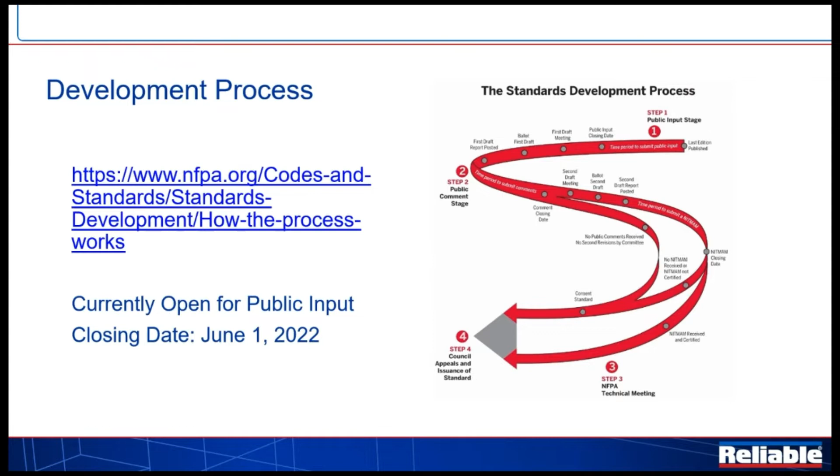Just real quick, the development process. I always like to remind folks to get involved in your industry. Here's how you do it. There's a link right there to the how-to process. The current edition of NFPA 13 is open for public input until June 1st. If there are things that you don't like or don't understand, please become involved in that process, and let's help make this document the best that it can be.

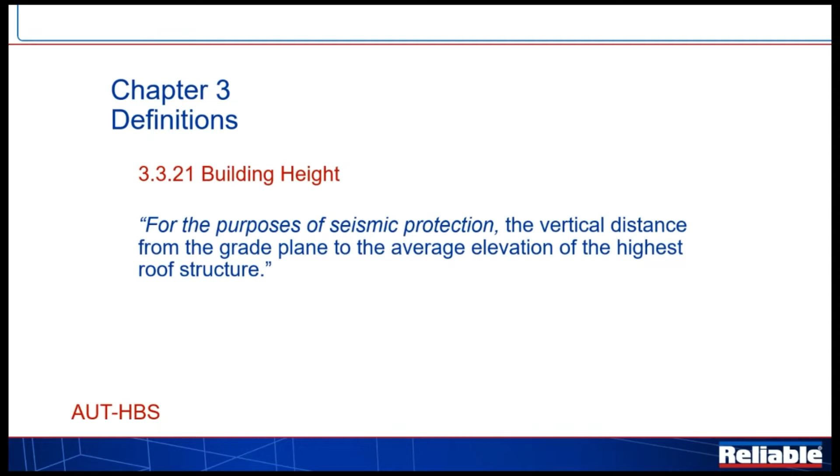So I'm going to go from front to back in the book. We're going to start with definitions. At the bottom, you can see the committee that's responsible for these definitions, it'll help you kind of put it in context. First one off the bat here is building height. You would think that would be something you could find on the architectural plans, but it needs to be defined. In this case, it's defined solely in the context of the purposes for seismic protection. It's not applicable to things about determining whether the building is a mid-rise or a high-rise or fire department access. It's simply for the purpose of seismic protection design.

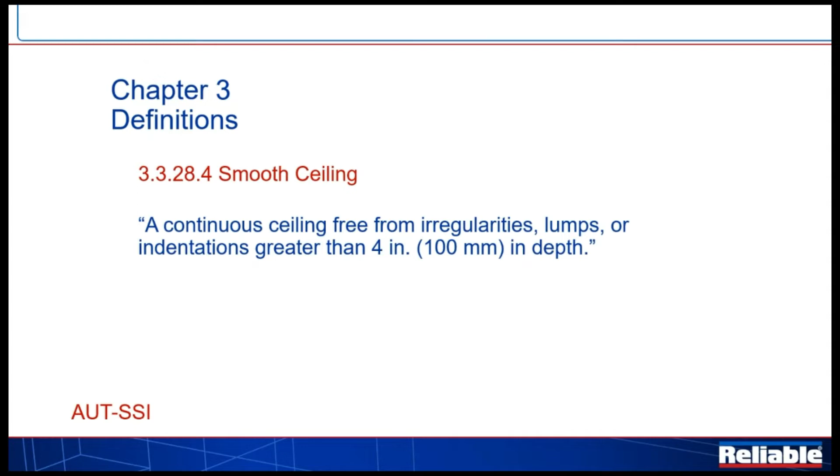Smooth ceiling. In the previous edition, there was some very subjective language that stated free from significant irregularities, lumps, etc. Now that has been more clearly defined as those irregularities, lumps, or indentations greater than 4 inches in depth, so we have something now we can actually measure. The term drop was not previously defined in the standard, but where it was used in the standard seemed to be in line with the historical definition of a vertical pipe supplying 1 sprinkler from above. So now that is what a drop is, 1 sprinkler. If it's more than 1 sprinkler, it's going to be a riser, and that has been defined in the standard for quite some time.

Exterior projections. So again, previously undefined in the standard, this is just an excellent 11-word example of a long committee debate over what seems to, again, be a fairly well understood concept.

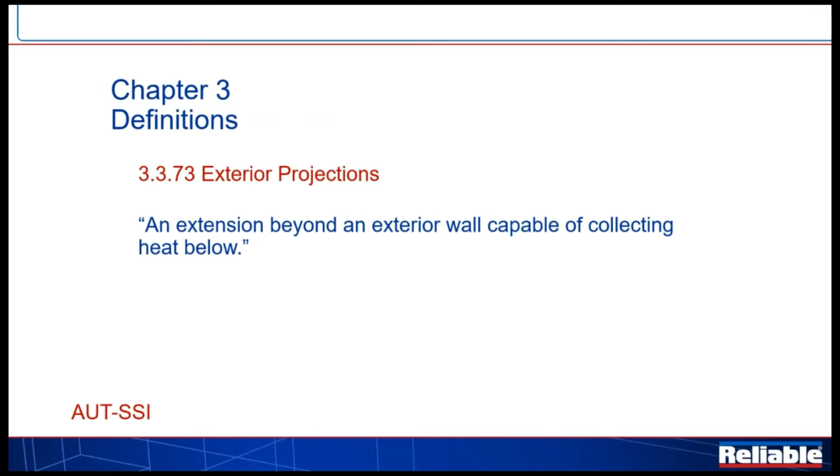However, without the words 'extension beyond an exterior wall,' it could have meant a vertical rooftop projection, and that was never the intent for what is now clearly defined as a horizontal projection from a building wall.

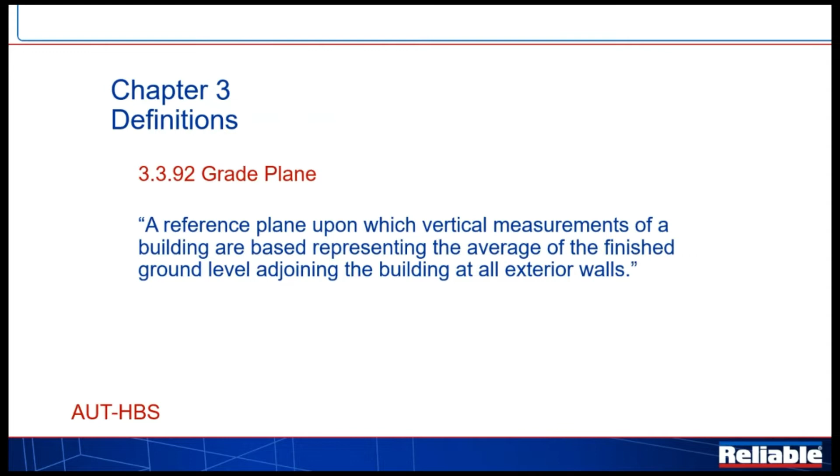Grade plane, we defined a little bit ago with building height, and there was a reference to grade plane. So now we have to define what the grade plane is, and for a sloped grade or an irregular grade around a building, it represents the average of that ground level across the whole perimeter of the building. Again, this is not to apply for building code or building height for code reasons, fire department access, etc. This all ties back to that seismic design issue.

Ordinary hazard group 1. So now we see a return to language that was in the standard before, but if you go into the 2019 edition, you would read something along the lines of where the quantity and combustibility of contents does not exceed the amount of miscellaneous storage of class 2, 3, 4 plastics, tires, etc. So in 2019, for some reason, the committee referenced ordinary hazard group 1 and tried to tie it to a miscellaneous storage design, is really what happened. That language of class 2, 3, 4 plastics, etc., to me seems more hazardous than even an ordinary hazard group 2. So we're now again seeing a return to some historical language in terms of moderate stockpiles, etc.

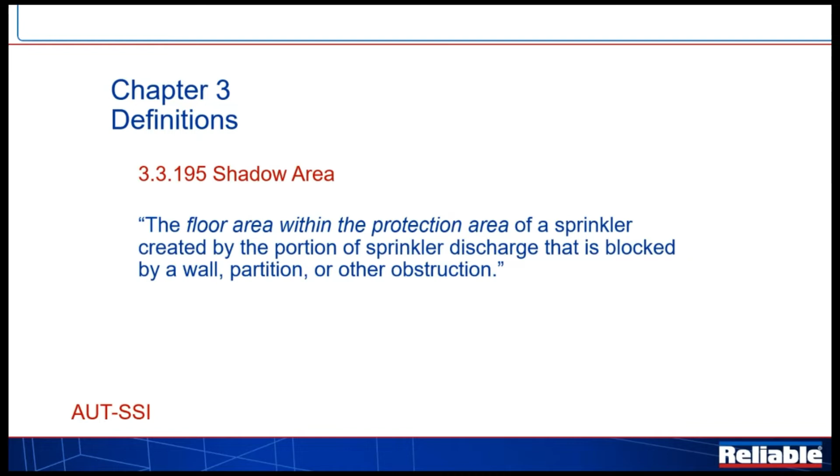The term shadow area we've had in the standard for a while, but there was not a reference to the floor area. There was a reference to the area of a sprinkler, and when you talk about the area of sprinkler discharge, you're now talking in a 3D world, which is really hard to measure right on the floor. So again, the idea, and now very clear, is that the line of protection on the floor, if it's blocked by an obstruction or whatever, that's what we're talking about, not the spray pattern itself, just the footprint on the floor.

You're going to see additional information as far as installation and maintenance and things like that in this edition and in future editions of NFPA 25.

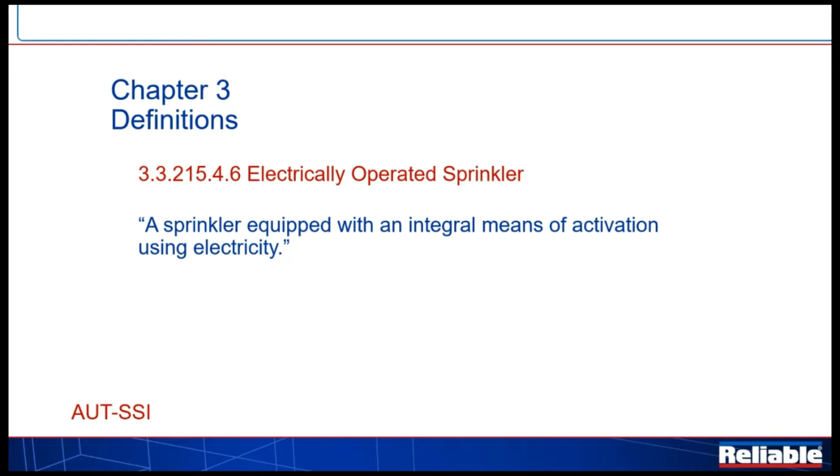Sprinkler system, again, has been defined a couple editions ago. We for a long time did not know what that definition entailed. It has been corrected a little bit.

The term water control valve, we're going to see, has been clearly now defined in terms of something along the lines of an alarm valve, a dry pipe valve, or a deluge valve. So you don't have to have a water control as defined water control valve on your system, but you do have to have a control valve. So simply they took the word water out of that definition. That was the installation committee that did that.

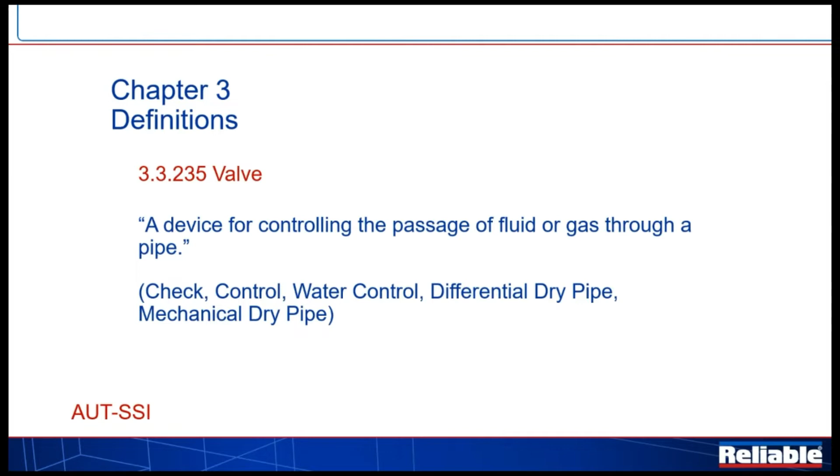Valve has been defined, and then is more specifically defined in other locations in the definitions as a check valve, control valve, water control valve, so that would be your deluge valve, etc.

Now we're going to jump out of the definitions and work our way through the standard in order, here, and Chapter 4, entitled General Requirements.

The first thing that we run into in general requirements for some odd reason is miscellaneous storage and things like that. So what this particular statement is intending, it's a very awkwardly worded statement in my opinion, but what it seems to be intending to say is that if you have solid shelves in areas defined as miscellaneous storage, they do not need to be sprinklered in most cases. The requirements for sprinklering solid shelves are found way out in Chapter 20. But again, for miscellaneous storage incidental to the use of the building, solid shelves are not required to be protected per 20.19.

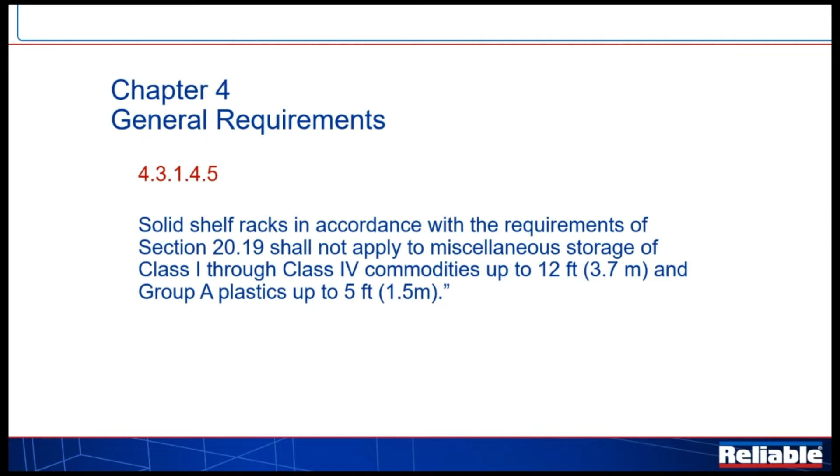Protection criteria for miscellaneous and low piled storage. So those two rolled together, but they're quite different in terms of what they are. It's not necessarily a new section in the standard, but just be aware that when you start talking about miscellaneous and low piled storage, you will be limited in building height. You'll be looking at things like OH1, OH2, EH1 designs, and anything above 10 feet. So miscellaneous storage is going to go up to that 12-foot mark in a lot of cases, 5 foot for Group A plastics, etc.

Once you're over that 10-foot mark, you're probably going to be putting a level of in-rack sprinklers into those storage occupancies.

Water supply treatment is another interesting one that probably needs cleaned up a little bit. For some reason, the ways of treating MIC and general corrosion have now been split out, even though we like to see repeat information rolled together. There are 4 methods to address MIC and 6 methods to address general corrosion, but about 4 of them are basically the same. So it needs cleaned up a little, and in reality it's talking more about pipe treatment than water supply treatment. Look for some cleanup along those lines in the future.

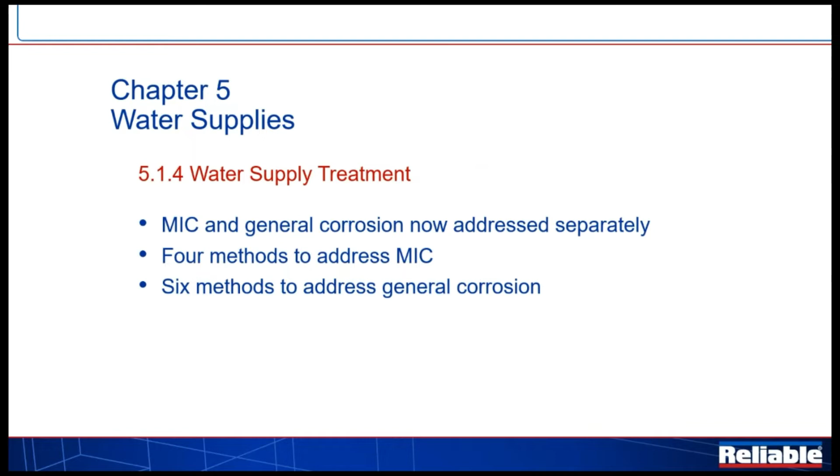Chapter 6, Installation Underground Piping - no, that is not a typo, that is the title of the chapter. Why it's not 'Installation of Underground Piping,' I have no idea, but I wanted to let you know I didn't make that mistake. We'll look at getting that corrected as well.

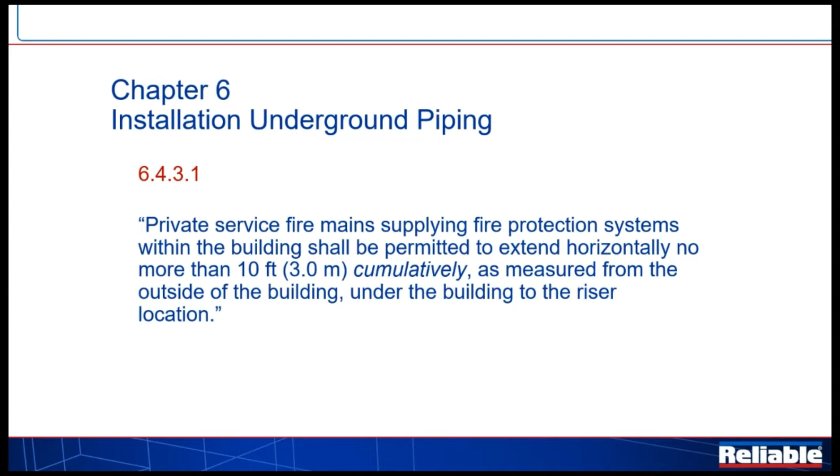We've known for a long time that we cannot run pipe for long distances under slabs inside a building. The committee, for some reason, changed the word 'under' to 'beneath,' except when they added this clarification, where we still see the word 'under.' The key thing is you cannot go 2 feet into the building and then 90 feet to the left along the wall and say you haven't gone more than 10 feet into the building. The word 'cumulatively' now accounts for that horizontal breakover that might occur around a grade beam or something like that. So it's not 10 feet in from the wall, it's 10 feet cumulatively under the slab.

Restrained joint systems - again, a simple change here, adding the word 'listed' in front of these particular types of connections. To me, it would make sense that that would always be understood, but without that word, it tells me that at some point there was a conflict between what an AHJ thought and what an underground or fire protection contractor thought. There was probably a little locking of horns here. Remember, AHJs are part of the public, and someone came in and said, let's clean this up - and now we very specifically require listed connections on our underground piping arrangements.

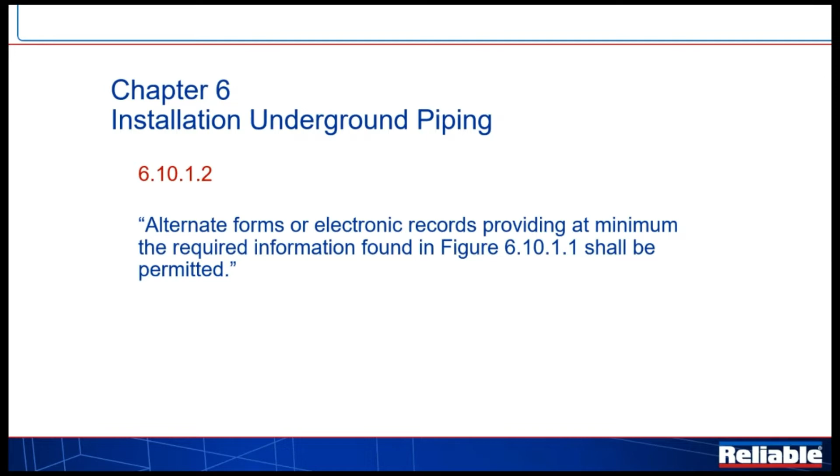With regard to keeping records of testing, this is going to essentially start cutting across all aspects of record keeping, all the way out into the NFPA 25 world. We're now going to see an acknowledgement that electronic records, with the AHJ's approval, are an accepted way of keeping records rather than everything being on paper. We all know the fallacies of trying to keep shop drawings and submittals in those nice clean riser rooms. You'll see similar information along these lines in NFPA 25 as well.

Flushing of piping - again, a couple of additional requirements or allowances thrown in here for when you cannot meet the maximum flow rates you need. For instance, if you're trying to flush an underground main up to a fire pump, that fire pump is providing extra energy into the system. All it's saying is that you will flow the maximum amount of water that you possibly can from that system to flush that main out. We also see the suction piping added to that requirement, and an acceptable method now is what's considered forceful swabbing of the pipe, with some additional requirements and constraints surrounding that method.

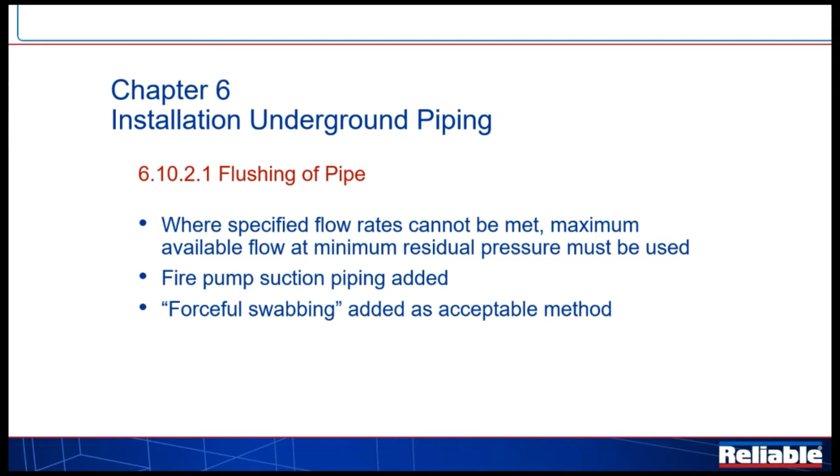Moving into Chapter 7, Components and Hardware, Temperature Characteristics of Fire Sprinklers. I had made a note that this seemed to be a solution in search of a problem - for some reason, the thought was to split glass bulbs and links out into two separate tables. The only real change I could find was for ordinary temperature sprinklers: now, 155-degree bulbs are permitted in areas up to 120 degrees ambient temperature. We still see that the 165-degree ordinary solder links are limited to the traditional 100-degree Fahrenheit ambient condition.

Perhaps there's some idea that glass bulbs are more durable in those temperatures for long periods of time. We would debate that ourselves. At the end, it doesn't really matter for us. I just don't like the idea that we've now essentially given building owners permission to take the temperature in those buildings up to 120 degrees if they're unoccupied, if there are glass bulb sprinklers in there. Doesn't make a lot of sense to me, but it is what it is.

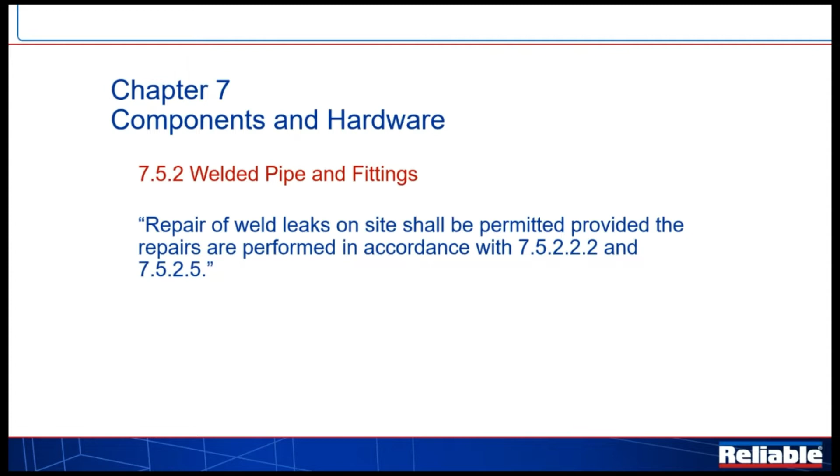Welded pipe and fittings. We have had the allowance to do field welding in the past with the appropriate safety measures and requirements for welding procedures, etc. But there was not a specific allowance to fix leaks. So now we have this allowance that the repair of weld leaks, in addition to field welding, is now approved, provided that you follow the appropriate safety measures and welding procedures specified in 7.5.2.2.2 and 7.5.2.5.

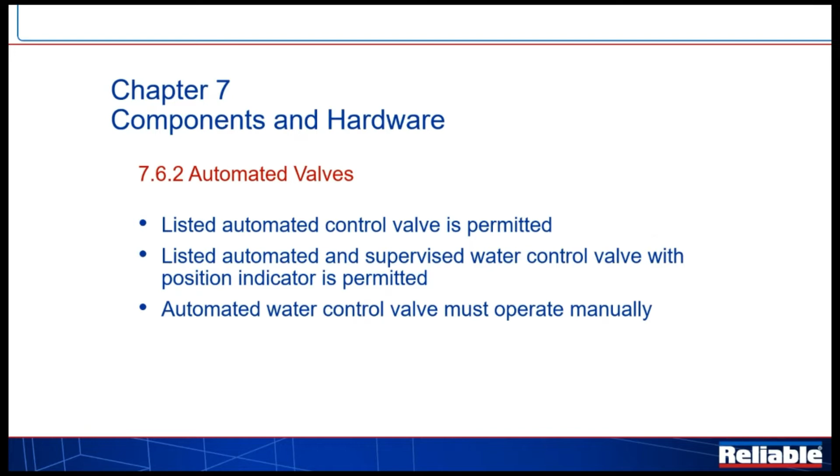Automated valves. I don't remember this one coming up in the committee meetings. Why it was added, I can only presume that someone may be looking to bring a product into the market, or has run up against a situation where an automated valve, perhaps a motorized control valve of some sort, that maybe was deemed unacceptable by the standard. Now essentially it is allowed, provided they're listed, provided they have the indicator, etc. And as well, they must be able to be operated manually. So that is now available to us. Whether or not those listed valves exist, I don't know, but we do have the opportunity.

Water flow alarm devices. This was an interesting debate in the committee, a long debate, with a lot of smart people in there trying to figure this stuff out for the industry. The requirements to get a water flow alarm have now been split into two: one for mechanical/water motor gong type activities, and one for electrical alarms. The 5 minute allowance that has historically been in there for the water motor gong remains.

For an electrical alarm, it has now been reduced to 100 seconds. It was my understanding that the thought here was that the device itself would trigger within 10 seconds and could have a retard as long as 90 seconds built into it. So that's how we get to that 100 seconds. Kind of more appropriate, almost to the NFPA 25 world in terms of testing, but obviously from the get-go we've got to meet these requirements for new systems.

You're going to see in NFPA 25 in the next edition some more information about the inspection and testing of devices in the automated world. Potter Electric, for instance, has that flow switch that basically triggers itself without flowing water. There's been a huge emphasis on saving water and things like that. So we now have some language about those devices and the installation of those devices, and you can see the words on the screen. It must be as effective as a manual examination, right? Trying to align this with what you would get in today's world.

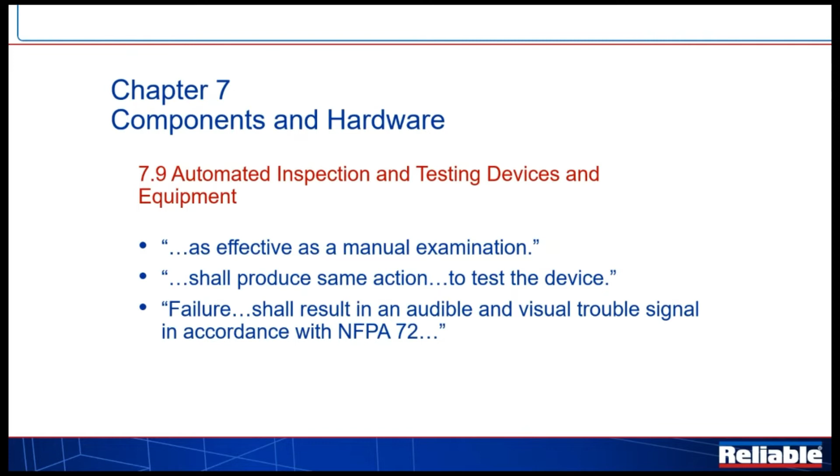It shall produce the same action, right? The vane in the water flow indicator must move, and then if the device fails, it must send a signal to the panel that says it's not working properly. So again, we're going to start, this will build in the next few cycles until it's fully vetted. But again, watch for some more information in NFPA 25.

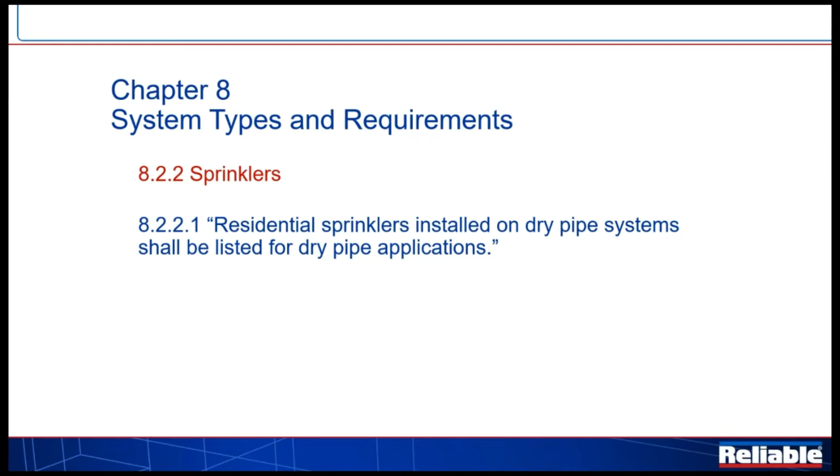This statement on the screen: residential sprinklers installed on dry pipe, of course they shall be listed for dry pipe applications. But if you look in 2019, what it says is residential sprinklers shall be listed for dry pipe applications. Very, very poor wording, because what it says is that I don't care if you're using them on a wet system, they shall be listed for dry pipe applications. Again, poor wording that's now been cleaned up. When used on dry pipe, obviously they need to be listed for dry pipe. And secondly, in the 2019 edition, that statement fell under the heading of dry pipe system water delivery, of all places. So again, a cleanup of the document to make that in a better spot.

The manifold test connection. You guys remember the table that came out a few cycles ago where you can do 1 orifice, 2 orifice, 3 orifice, 4 orifice, and your water delivery time descends a little bit into that 40-second range, etc. It seemed that table was built for the fluid delivery program, and I believe it's still applicable to that. However, it's been moved into its own section, so it's essentially been extracted out into its own area.

Underneath it says that a system meeting the requirements of this section, in other words if you build a 4-manifold or 4-orifice manifold, shall not be required to also meet these other 2 requirements. Those 2 requirements are 8232, a 60-second water delivery, and 8235, the option to calculate water delivery using the available programs.

So it's very interesting, I don't know if it was the intent, and this will be an interesting discussion this cycle. If I manifold it, I don't have to do either of those. That's technically the wording as I understand it. So we'll see if that holds and whether or not that was actually the intent.

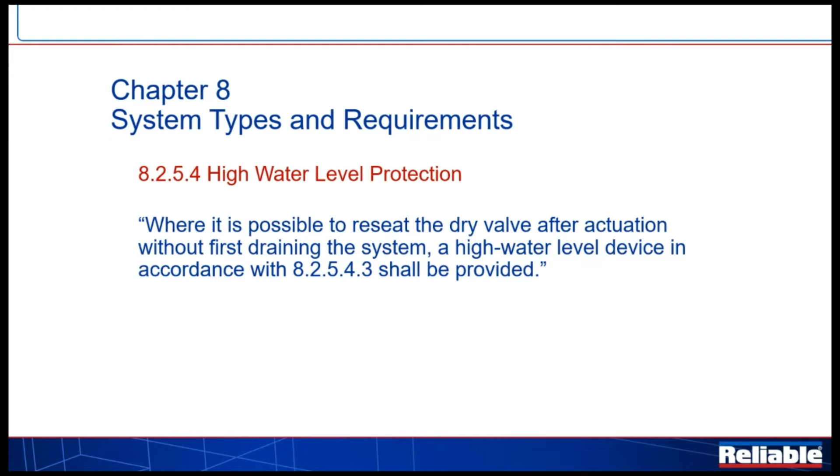System types and requirements. We are going to see in the standard an allowance to use a C factor of 120 on dry pipe systems and double interlock pre-action systems when nitrogen is being used as the supervisory gas.

And the way that's going to be allowed, we can't just say hey, we're going to put it on and turn it off, right? That's the fear, somebody's going to put this generator on, they're going to turn it off. So again, we have to put the rules down. If you're going to want to use that C factor of 120, it has to be a listed generator, a minimum of 98%. We're now told how much leak rate is allowed, 1.5 psi per hour.

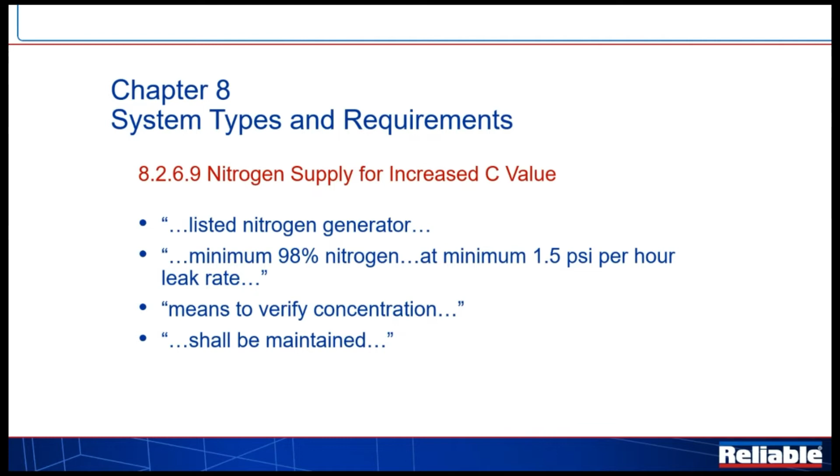The system, the generator has to be able to maintain that, even if it doesn't exist, it's got to be able to maintain that. You've got to be able to verify the concentration. The generator manufacturers have all the devices and technology to be able to do that. And then again, kind of rolling into the NFPA 25 side of things, it shall be properly maintained, and there will be additional information on what that looks like in the future in NFPA 25.

Air pressure values for single interlock pre-action systems, the requirements for double interlock systems being a minimum of 7 psi to basically remove that seat out of the sprinkler. We know we need 7 psi, that's always been the historical minimum.

Single interlock systems convert to wet pipe systems upon operation of the detection, therefore the air pressure or nitrogen pressure really doesn't come into play. Old systems, Reliable had one years ago that used 30 ounces of air, a very, very small puff of air in the piping. The problem is it's very difficult to manage low pressure alarms when you're in those low ranges. So again, all it's saying now is look to the manufacturer to give you some guidance on those single interlock systems.

This 8615 is regarding antifreeze and some of the new products available out there. When I look at this, I just think, we do shop drawings, this information is all on the shop drawings, or should be. Now we've got to go out and hang a placard on the system. Sometimes I think we go placard crazy in this industry, but regardless, you will be required to hang this sign out there.

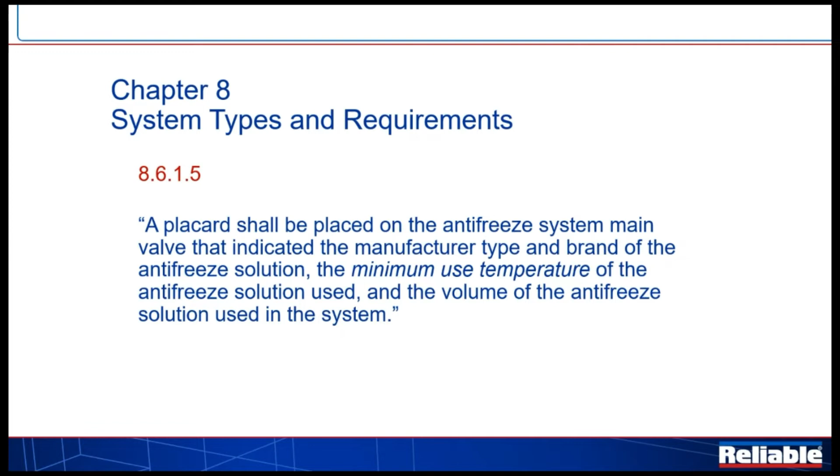All of the new products, the listed products, are going to tell you what the minimum temperature it's listed at. And so this is just essentially a nod to the fact that we're not going to be able to change that rating by adding more of something. Pretty straightforward concept there.

A new area that does not require sprinklers. Very common to see dryer duct vents going from the laundry room out to the exterior wall. Oftentimes we're running cabling in there, maybe even running fire protection piping in those soffits. And in a combustible environment, if it's built with wood, could you essentially be creating a space that needs sprinklered?

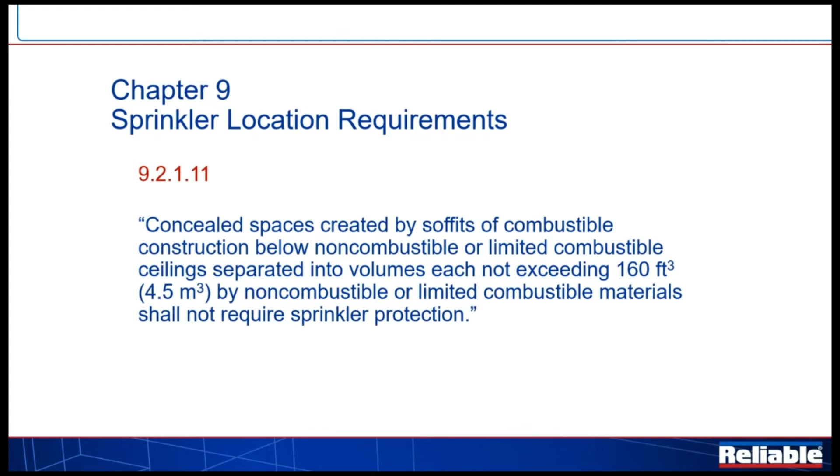Nobody wants to be doing that, but we now can see that if we're doing this properly, we have this 160 cubic foot requirement that we can now point to the AHJ and say, here's why we're not protecting inside this soffit. So that's nice language to have added to our repertoire.

Sprinkler location requirements. 9.2.2, we've added the word exterior platform. So again, one of these semantic debates, whether or not exterior docks, the word exterior applied to platforms, it now clearly does. In the past, you may have attempted to do something like an area below the stage in a school that had no storage in it, was non-accessible, but perhaps it was combustible. And you may have pointed to this and said, this is why I'm not sprinklering that area. Now, very clearly, this states that these are for exterior platforms.

Could you build an interior platform still that does not require sprinklers? Yes, you could, but you would now have to go back to 9.2.1, which is that long list of areas that don't require sprinklers in order to address that interior platform. So very clearly now exterior related.

Sprinklers shall be required for porte-cocheres that are located directly below floors. So imagine you're pulling up to the nursing home or whatever type of occupancy it is, but instead of a carport type of porte-cochere, it's underneath an occupied part of the building. So in the past, it could have been perceived, and most likely was, as if that was non-combustible, right? It said non-combustible porte-cocheres did not require to be sprinklered. Again, now making perfect sense in my opinion, that if there is occupancy above it and you're essentially under a building, those areas must be protected.

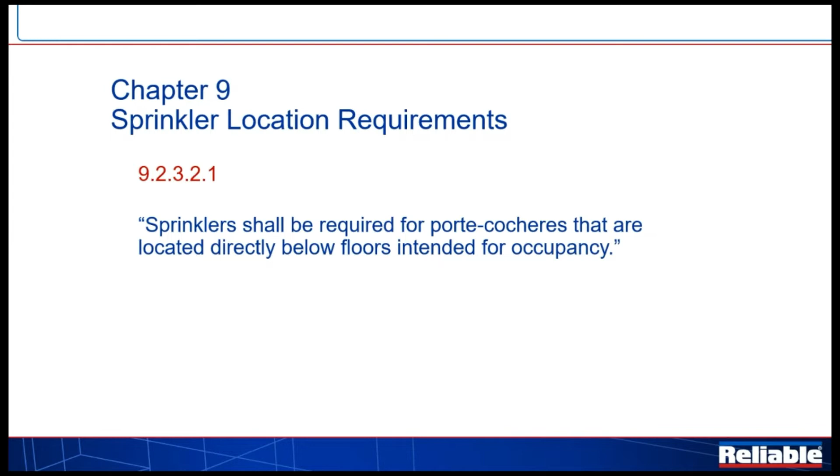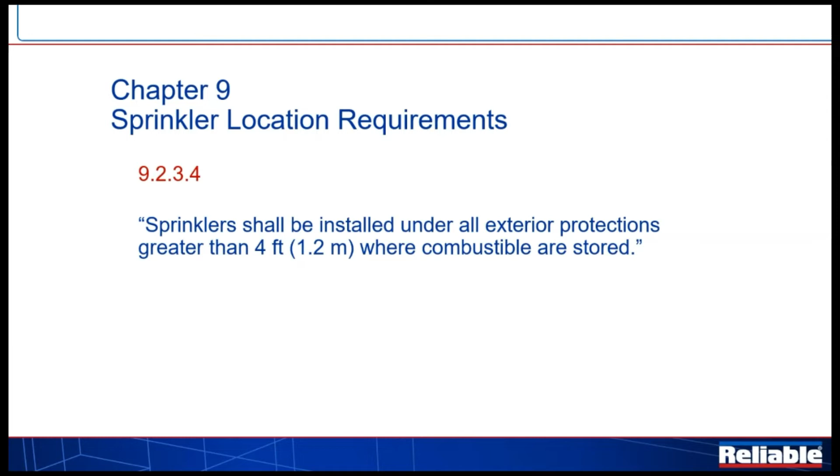If you were to go through NFPA 13, 2019, again, which I did page by page, it actually appears in 2 spots. One says 2 and one says 4. So the requirement for the 2 foot has been removed in the 2022, and it is now 4 foot where combustibles are stored. Again, just some cleanup, where things appear twice in the standard, that was an offshoot of the complete rewrite of the 2019 edition. So there were bound to be some errors, and we're seeing some of those get cleaned up.

Sprinklers shall not be required in closets and pantries where other governing laws, etc. So other standards, maybe it's NFPA 101. I don't know what they are, but if there are other recognized standards that say that these closets and pantries don't need to be protected, this is the allowance for an AHJ to allow you to leave those sprinklers out. You'll notice that it's not specific to hotels, motels, or anything. It's any closet or pantries that are addressed by another NFPA standard.

Furniture and cabinets. If you've been in a modern hotel room, we spend a lot of time in Marriotts ourselves. Very common to see a big piece of furniture that encompasses the wardrobe, right? The coffee maker, the microwave, the desk. They bring these in, they bolt them to the wall, and even though it's a quote-unquote closet, the standard is now clarifying that these move-in pieces of furniture do not require sprinklers. They do remind us in these sections, however, to make sure that the sprinklers we put in the room are spaced to the back wall of that environment.

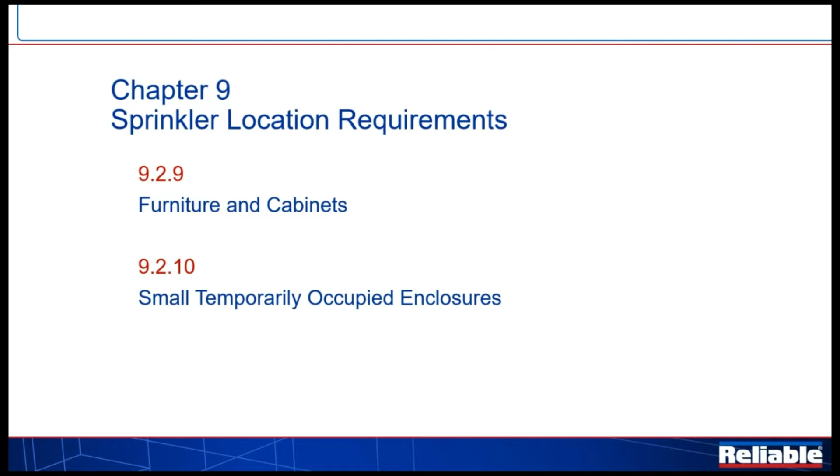And 9.4.1.2, if you don't know what this one is, you're going to want to make sure you lock this one in your brain and highlight it. It states that sprinklers can be used outside of their listing when specific situations exist that require unusual water distribution. Okay, so an example of this could be something like putting a pendant sprinkler in the sidewall position in a horizontal duct, right? We put a sidewall in there, it's going to spray right to the other side of that small duct, and it's just going to create a flood in there.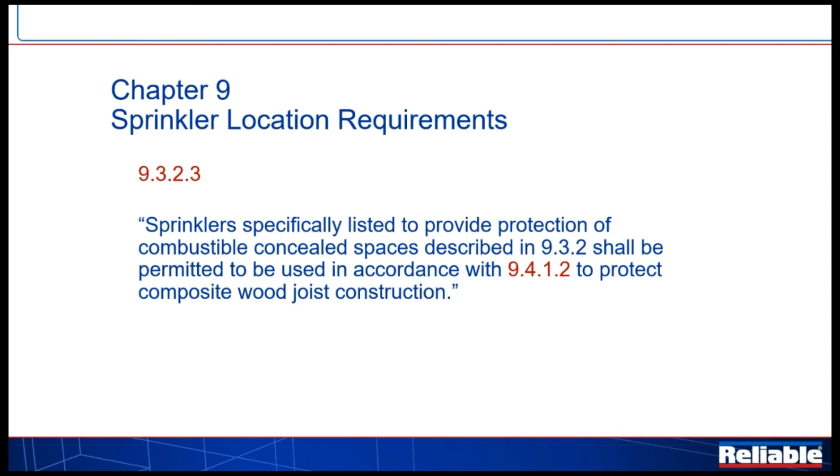What you might want to think about doing is throwing some water sideways off of that pendant deflector in the sidewall position. This would be an opportunity to say, hey, this is better fire protection, and this section 9.4.1.2 is my allowance to do that. You might not always win, but be aware that the opportunity presents itself there.

Elevator machine rooms. This section was formerly called elevator hoistways and machine rooms. That was the title. For some reason, maybe it's an architectural concept or a building code concept, we now have to identify machinery spaces, control rooms, control spaces, etc. You probably see these called out on the plans. Again, why we have to do this, I'm not quite sure, but it's there.

The couple things that have changed, the temperature requirement used to state they needed to be intermediate. That may not have been enough. I've been in some very hot elevator machine rooms. So for the standard to say, use this temperature sprinkler in this environment, probably not a good idea. We now see that they're not going to specify the temperature rating. They're going to leave that up to us. But what they are going to tell us is the sprinklers in those environments will be standard response sprinklers. Unless the requirements of et cetera are met, ordinary or intermediate temperature sprinklers shall be permitted.

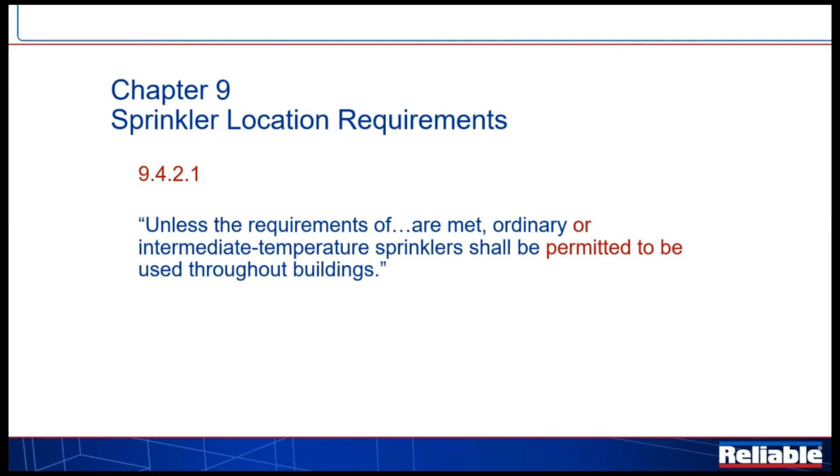So what did this used to say? It said ordinary and intermediate temperature sprinklers shall be required. Again, poor wording. We kind of knew what we meant to say. We just didn't say it properly. So now what we're going to say is you have your choice of ordinary or intermediate sprinklers. You're permitted to use either one throughout the building. We're seeing a lot of movement these days, particularly in the residential world, of intermediate temperature sprinklers being installed throughout environments. And now that this language is cleared up, that should be a little easier pill for the AHJ to swallow.

So you see the word global on this table formatting. And we're just going to walk through one example of this, but it's going to cut across a lot of ground in the other obstruction tables and the way tables were formatted in 13 historically. So imagine the standard beam rule that we use. How high can our deflector be above the bottom of the beam given the distance away from the beam? Less than 1 foot, we have to be even or below the bottom of the beam.

So what did it used to say? There it is, 0. Now we go to 1 foot to less than 1'6". What it said is that you must be 2.5 inches above. The strict language said you must be 2.5 inches above. Well, that's not true. You had to be 2.5 inches or less. I mean, the better spot would be further down and allow us to spray better under that beam. So these debates have been swirling in the committees for years and years.

Finally, they have come to consensus that the better way to say it is what is shown there. Less than 1 foot, we're 0 inches. We've got to be equal or below. If we're 1 foot away, we're 2.5 inches above the bottom of the beam or less. So that's lower to the bottom of the beam, et cetera, et cetera. And all of those tables for EC sprinklers and ESFR and all that are going to be reformatted to make this just a little bit clearer.

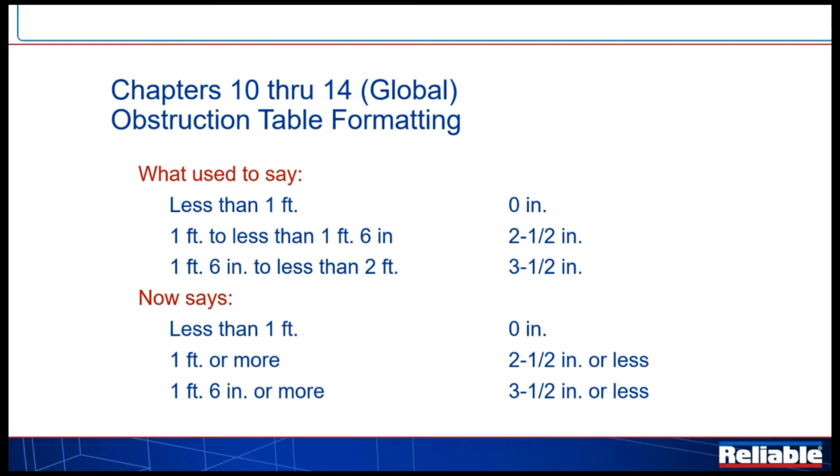Another kind of quasi-global addition that's been made is for narrow hallways up to 6 feet wide. Again, there's some limitations here. You can have a maximum 12-inch obstruction in the center of that hallway, and you can have a sprinkler dead center on that obstruction as long as you're 12 inches away. That is now going to be allowed.

Two additions to the historical places where we can use sidewall spray sprinklers. We talked earlier about exterior projections. So now we know what that is: it projects out from the side of the wall and is capable of collecting heat. We identified that earlier. We can now say we can use sidewall spray sprinklers for that.

And in the event that someone says we don't have direction on how to handle car stackers, I'm not going to say that it's clear as mud, which it kind of is, but we now have the allowance to use sidewall spray sprinklers in car stackers and car lift systems, as long as we provide them under each level of cars.

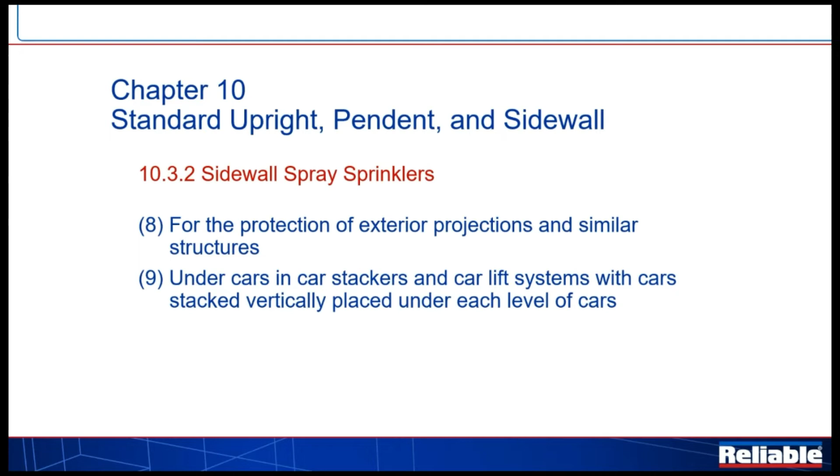No real guidance given on, again, what that occupancy is. Is it ordinary, group 1, group 2, extra? At least in my opinion, there's still some work to be done here, but now we're seeing that these things have to be protected. We've got to give some direction to the contractor on how to do this. So again, now can be used for car stackers.

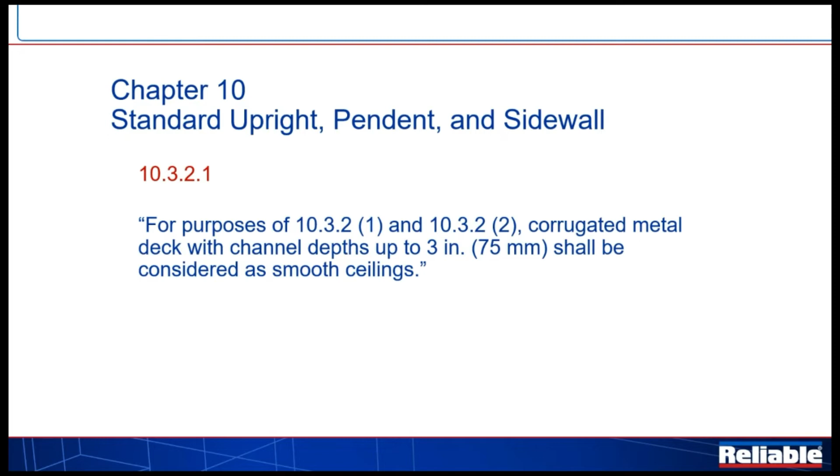This was an interesting one as well. If you're in a building that has Q decking or pan decking, the corrugated metal deck, and you, for clearance reasons or whatever, had to throw water outward from a beam, and you looked at that corrugated deck and said, I can't use sidewalls here because they're not listed for this. The standard is now telling us that when those channel depths are up to 3 inches, you can consider it a smooth ceiling and use sidewalls for that application. So that's just kind of a nice little addition as well.

We now move into extended coverage upright, pendant, and sidewall sprinklers for suspended or floor-mounted obstructions. So think in terms of the privacy curtain that's hung around your booth at the hospital, or perhaps a pony wall coming up from the floor. We see these new requirements provided for ordinary hazard when using the EC sprinklers. We don't see them for standard spray for ordinary hazard. And the only thing I can think of is that the drastically different spray patterns that come off of these deflectors must account for this allowance in the EC flat spray world to get some water on the backside of these obstructions.

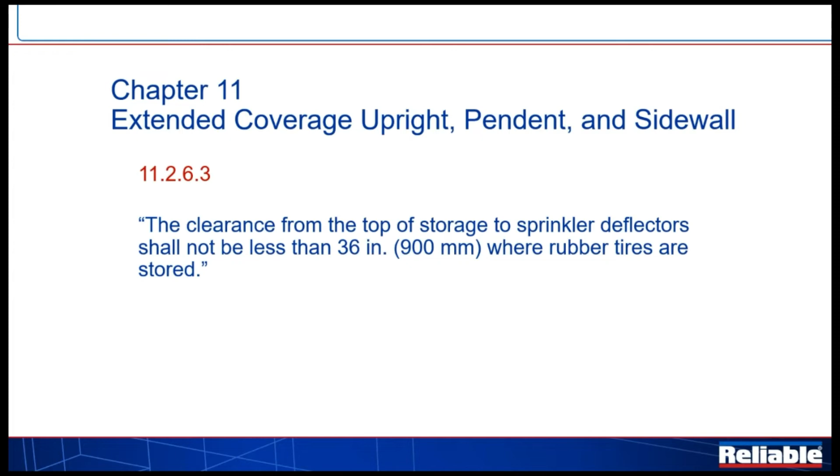A nice reminder that for EC sprinklers, for rubber tires, that 18-inch traditional clearance, right? We have 36 for CMSA and ESFR, but for CMDA and these other types of sprinklers, you could have thought maybe that 18 inches was all the clearance you needed for rubber tires, and rubber tires is always going to be a 36-inch clearance to the deflector, regardless of the sprinkler type.

Maximum distance between sprinklers was an interesting issue, particularly with sidewalls. When you had sidewall sprinklers throwing toward another sprinkler, the old wording stated that you could not have a sprinkler within the coverage area of the opposing sprinkler. The debate was always whether that meant the maximum coverage area or the hydraulically calculated coverage area. If I have a sidewall that can do 16 by 16 and is also listed to do 14 by 26, am I using the 16-foot throw as my mark to the sprinkler on the other side, or am I using 26? It was not clear, and there was a lot of debate about this. Finally we decided to just make it a set distance: we're going to use 12 feet, and that is now the rule.

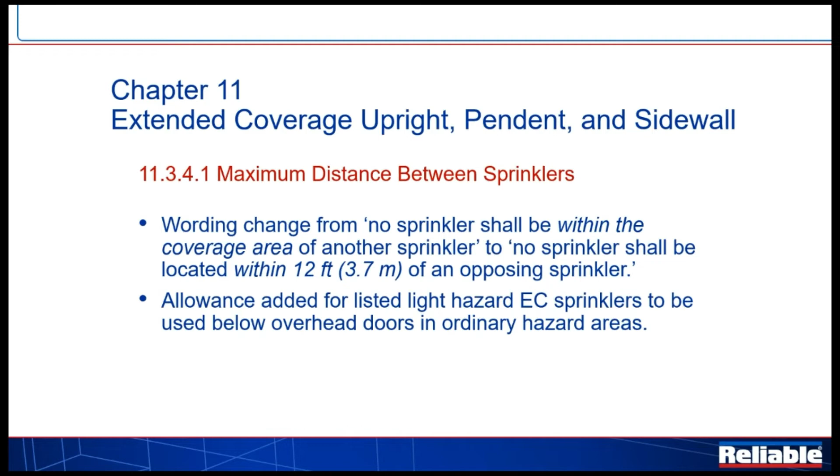Another addition was the allowance for light hazard EC sprinklers to be used below overhead doors, not in a storage occupancy, but in ordinary hazard areas.

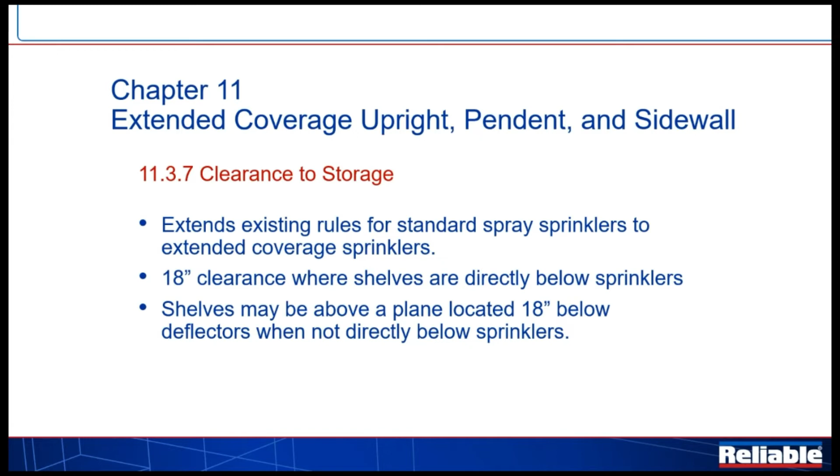Clearance to storage: imagine a small closet or storage room with shelves along each wall, and you're having trouble locating sprinklers because of lights or other obstructions. We've had this rule for standard spray sprinklers and have now extended it to extended coverage sprinklers. If the shelf is under the sprinkler, and the sprinkler has to be moved off to the side for some reason, you must maintain 18 inches to the top of whatever's stored on that shelf. If the sprinkler is pulled out off the edge of the closet, so it's not directly over the shelf, then shelves can go all the way up to the ceiling.

This is a pretty straightforward one. It was previously mentioned in one location as the 36-inch rule. All we've done is add some new wording and clean up figures to indicate that in a peaked ceiling area for residential, regardless of how you place those sprinklers, you shall have a sprinkler within 36 inches of the peak in some form or fashion.

Pendent residential, recessed pendent, and concealed. Concealed is highlighted because in the 2019 edition there was concern leading into that adoption that concealed sprinklers weren't going to perform properly in very deep beams, up to 14 inches deep. So in 2019, that got lowered to 4 inches, because we've always had a 1-to-4 deflector distance rule for residential sprinklers—that was the magic number. For lack of better information, the 2019 edition reduced it to a 4-inch beam depth for concealed sprinklers. Now, with future testing and people looking at it in different ways, we're going back to allowing concealed sprinklers to be installed in those 14-inch deep beams. So that's good to have back.

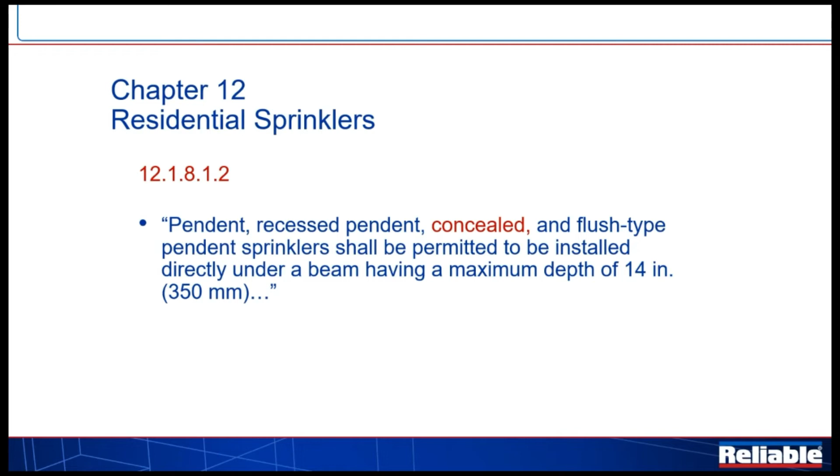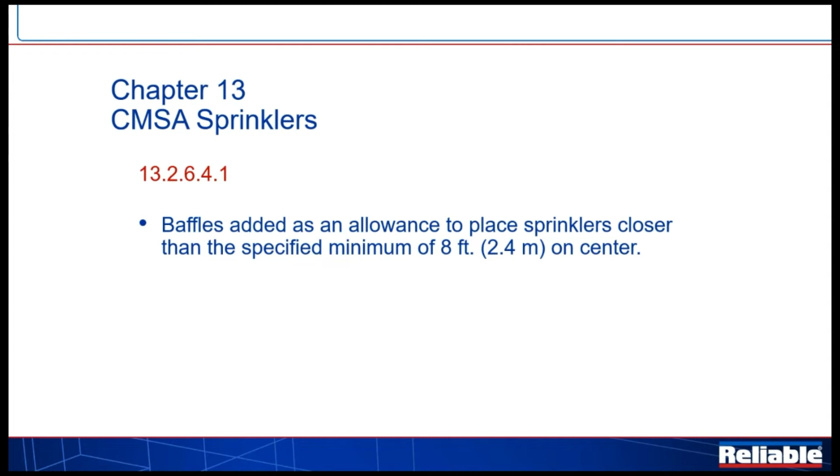CMSA sprinklers—a few years back, maybe 2013 or 2016, we saw baffles being added to different types of sprinklers. They've now been added to CMSA sprinklers to give us some relief when sprinklers are closer than 8 feet on center, and the rules spell out how long and how deep those baffles have to be.

The requirement for ESFR in obstructed construction to be placed in each channel where structural members exceed 12 inches is not new. What was missing was guidance on our hydraulic calculations at that point, since the standard says ESFR sprinklers cannot be closer than 8 feet apart. That wasn't a cold-solder issue—it was an acknowledgment that setting off too many ESFR sprinklers might over-challenge our piping network. So now we're saying that if the sprinklers are separated and the line of sight between them is completely broken by that structural member, they can be less than 8 feet apart. However, within the channels, along the branch lines or spacing within those channels, you must still meet the minimum and maximum spacing requirements, and you're still going to run a 12-head sprinkler calculation in that environment.

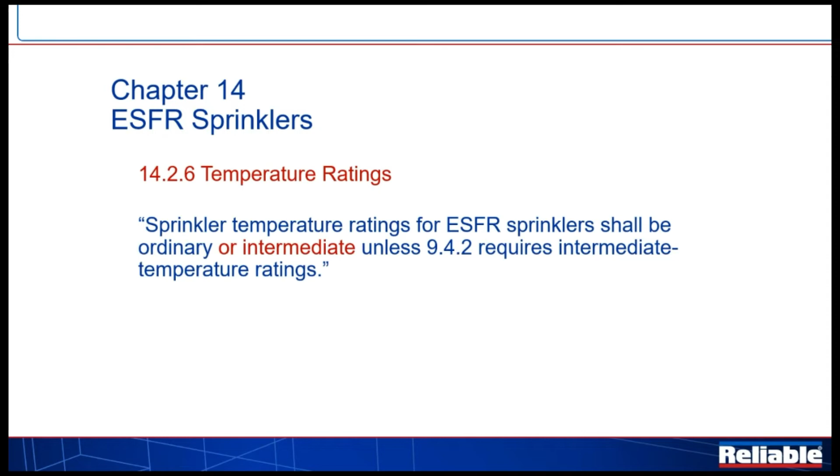Previous editions stated that ordinary temperature ESFR sprinklers shall be used unless near a heat source. This is just basically saying if you want to use intermediate temperature throughout, you may now do that.

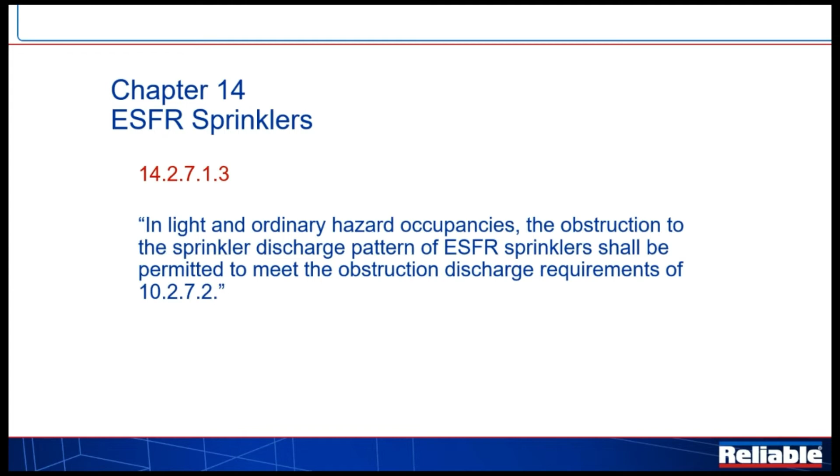Again, since 2016, I believe, might have been 13, we've been permitted to protect light and ordinary hazard occupancies with ESFR. People knew that it was happening, and there was really no reason not to allow it. What was missing was how do we handle obstructions, and do we have to, in a light hazard occupancy, meet all of the heavy ESFR obstruction requirements? The answer is no. You now, in those environments where ESFR is protecting those occupancies, just basically divert back to 10.2.7.2, which is the basic rules for light and ordinary hazard.

This is an interesting one. I didn't even realize this was going in there, and now it's saying that baffles can be allowed to place ESFR sprinklers closer than 8 feet on center. It doesn't tell us what to do for hydraulic calculations, though, at least that I could find. So I think there's got to be some thought given to what are we doing there, and is this really a valid use of baffles?

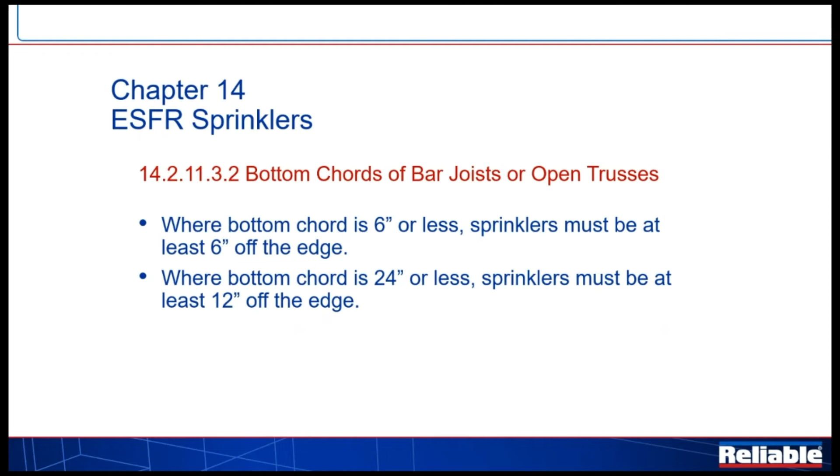Bottom chords of bar joists. Historically, it's been 1 foot off the edge, regardless of the width. Testing has been done to show that those rules were a little bit draconian. So now we see that if the bottom chord is 6 inches or less, we'll be able to pull that ESFR sprinkler as close as 6 inches to the edge of that typically flanged lower member. The second part of this needs reworded, because where bottom chord is 24 inches or less, well, 6 inches is less than 24. By the way it's written, you'd still have to be 12 inches off. That obviously was not the intent. The intent is between over 6, and up to 24, you'll be 12 inches off. So that needs cleaned up a little bit in the next edition of the standard as well.

Sprinklers, ESFR sprinklers on branch lines. If the lines are 4 inches and smaller, you can directly mount them. I think we've been doing that for a long time. I guess the question is, are we doing 6-inch lines? If you are, if that's what you're calling them, you need to offset them 12 inches away from the pipe, or sprig them up, stub them up a minimum of 12 inches above the pipe. I think instead of saying branch lines in the title of this, we should just say ESFR sprinklers on pipe, something like that. So there is my alarm for 5 minutes to go here.

Do we have questions that need to be answered at this point? Yeah, there's a few questions. Let's start with what should be a quick one.

You talked about the allowance for C factor of 120 when using a nitrogen system. Does that apply to dry pipe and double interlock pre-action systems, both of those? Yes, that's it. Now it may be in the dry pipe section of the standard, and we see a lot of requirements in the dry pipe section that are later referred back to when we start talking about double interlock. But it's just important to realize that double interlock pre-action system is nothing more than a dry system with a detection component on the front end. So as it sits there, it's acting and is designed just like a dry pipe system.

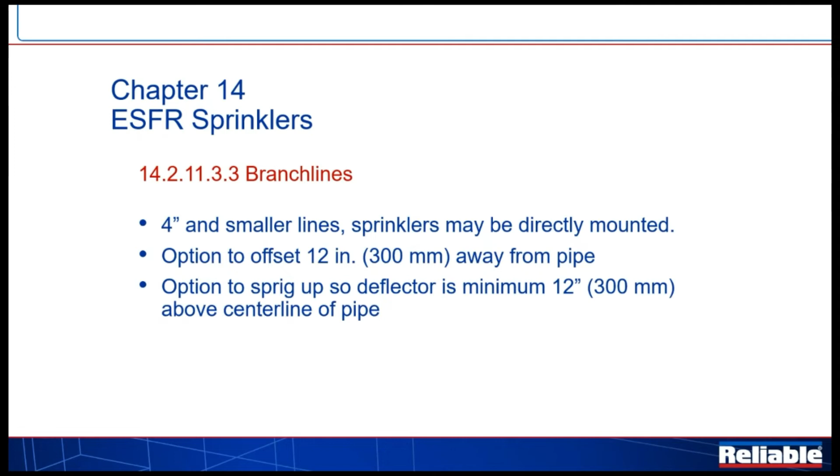Attic sprinklers—this is interesting. We were like, why does this have to be in here? There seemed to be a perception that because we have attic sprinklers, you must use them, and that was never the case. Attic sprinklers are there for convenience and provide better protection, let's not make any mistake about that. They also allow the use of CPVC piping, but you are not required to use them in an attic environment—you're permitted to use them.

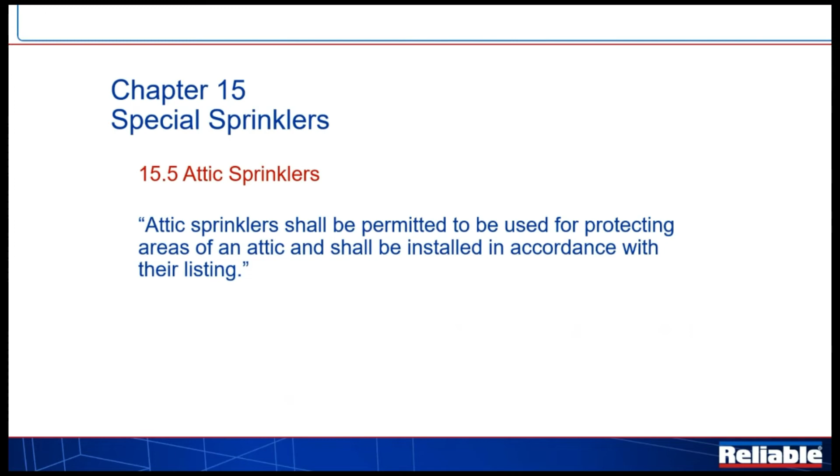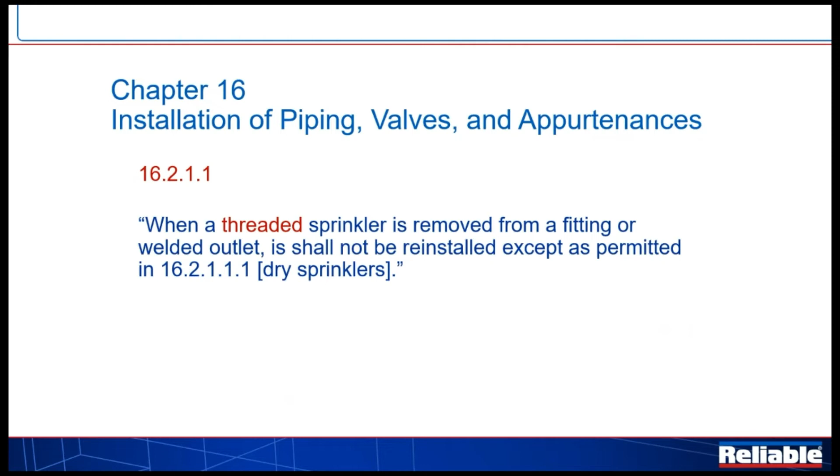The previous wording said that when a sprinkler is removed from a fitting, it has now been clarified to say when a threaded sprinkler is removed. So we see the Victaulic V9 grooved end sprinklers, and there are probably other connection methods out there that won't stress the orifices when sprinklers are put in or taken out. This applies to threaded sprinklers only, with the exception of dry barrel sprinklers, where the water seal orifice is separated from the sprinkler itself—those can be removed and reinstalled according to the manufacturer's requirements.

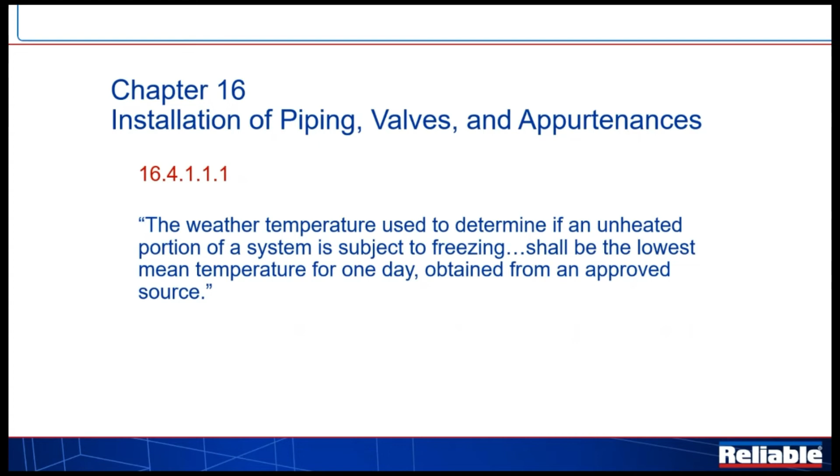The weather temperature—so who determines when we need to put in a dry system on the outside of the building because the temperature may get to a certain degree? Where did that information come from? There were historical thermographic charts in the standard that put the U.S. about the size of a playing card, and you were supposed to figure out which side of a particular line you were on. Now we've cleaned that up and said you shall get the information from an approved source. Remember, approved means the AHJ must approve that. So if the AHJ says that Floyd the barber knows what the temperature is going to be because he's lived here for 100 years, I suppose that could be an approved source. Realistically though, is it NOAA, the National Oceanic and Atmospheric Administration? Is it the Weather Channel? At least we have to go somewhere to get this information.

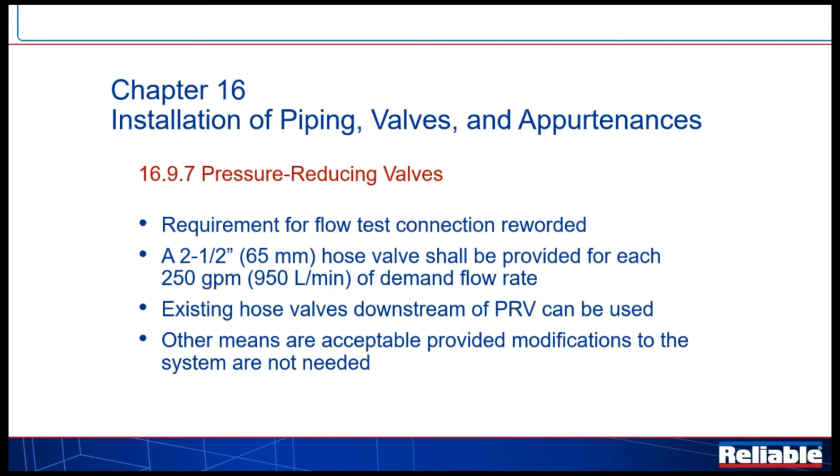Chapter 16 covers a lot of ground—installation of piping, valves, and appurtenances is where we're at. We talk about pressure reducing valves, and we've thought and been told there has to be a way to test these devices. We now have language that tells us what this looks like. We've reworded the requirement: for every 250 GPM of demand, we're going to provide a single 2.5-inch hose, so just divide by 250, that's your number of hoses. If the valves are existing downstream for some reason, those are usable, which kind of makes sense. And then other means—this is just the opening to get creative—are acceptable, provided you don't have to modify the system. I think what they mean is you're not going to say, I'm going to take this check valve out and reverse it—that's a modification to the system and will not be allowed.

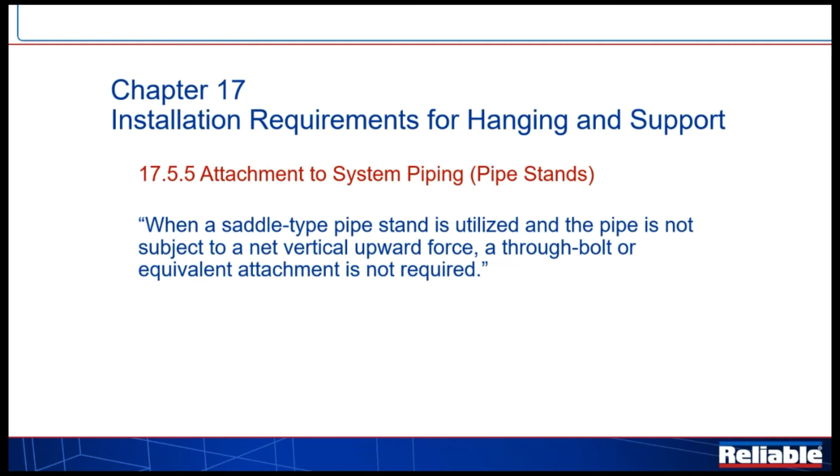Kind of small stuff here. When you're setting pipe into a saddle, typically we've U-bolted those in or somehow anchored them down. We now have an allowance to simply let the pipe rest in the saddle when it's not subjected to a net vertical upward force. I had to look that up to see what it meant, and what comes up is a lot of talk about buoyancy. If you've ever been in a swimming pool and tried to pull a basketball under the water, you're fighting that net vertical upward force. So just be aware you're not necessarily required to anchor that pipe into the saddle.

This is an interesting one, and it took me a while to think this through. NFPA 13, 18.5.9.6, says the weight of the branch line shall be added, in the zone of influence, all the way back to your main to determine the spacing of your lateral braces on that main. It's to pick up that weight of the branch lines coming in.

What it's saying now is that if you don't want to do that, you can go out to your branch lines and brace them at 80 feet, taking some of that load with longitudinal braces, essentially taking it off the lateral brace on the main. I'm thinking, why would you want to do that? Well, depending on the weight carried on each line, you may not have an attachment method that can carry it. So if that's the case, simply longitudinally brace those branch lines at 80 feet on center and let that weight be taken off the lateral braces. Maybe if those lines are big enough, this is a cheaper route than drastically cutting down the spacing of the lateral braces on the mains.

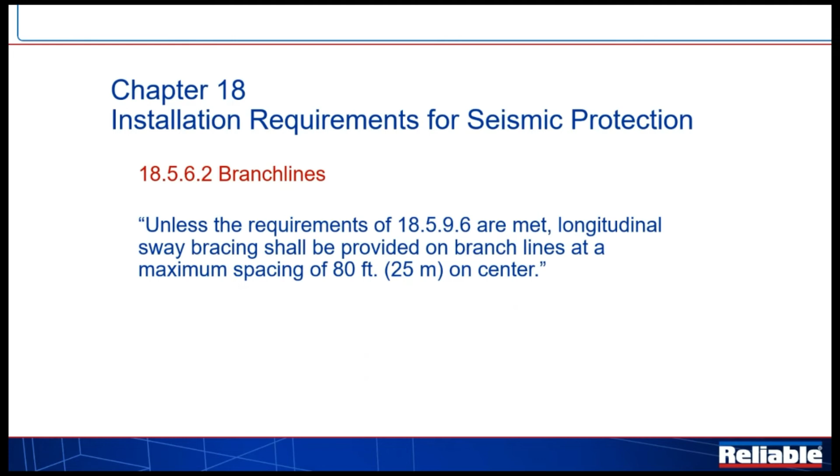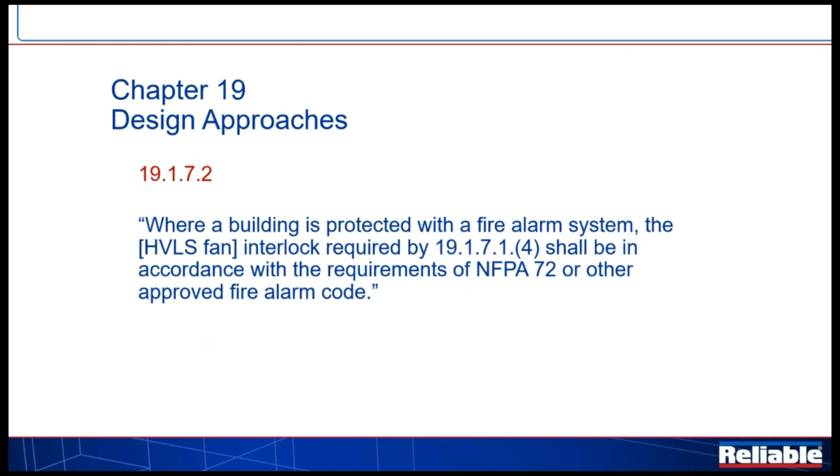HVLS fans - there should be no surprise when those are in buildings, and we see them used in a lot of places now. They must shut down, they must depower, when the water flow indicator or water flow device goes off. All this is saying is that the tie-in to make that device shut down has to be connected to an NFPA 72 approved code. It's got to be tied into it. Just kind of makes sense.

Single point density - we may not have heard a lot about this. We started moving this direction a few years ago with the truncated curves and all the storage areas and some of these others. It's here now, it's not complicated, it's not all that harmful. I think it will actually simplify things a little bit. When you have areas that don't require the 3,000 square foot design area, you're simply going to pick the traditional point one, point one five, point two, point three, point four, and calculate. You don't have the option anymore of sliding up the curves. It solves some problems, but it was kind of a remote situation. So you've got that one at the lower end.

If you have unsprinklered combustible concealed spaces and you need the 3,000 square foot design area, you're going to have those densities given down below. All of the old information will remain in the standards, probably for a number of years, now with new headings stating these are only to be used for the evaluation of existing systems.

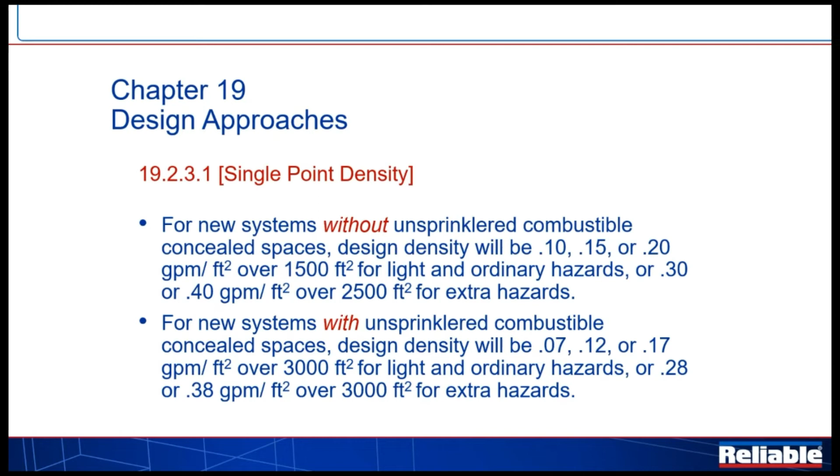So again, new systems, you're going to be looking at essentially just a single point density. Okay, the room design method. Where does this come into play? For an NFPA 13 residential design, you're going to either be a 4-head demand, or if you've got unsprinklered combustible concealed spaces, you're going to be an 8 sprinkler demand. Look at that 8 sprinkler demand and see if the room design method might make more sense. And this is the allowance to be able to do that.

Protection of storage. This again is just an allowance to acknowledge the fact that there are sprinklers out there that can do things, are listed to do things that you typically can't find in the NFPA standard. The most prevalent example of that is the ability to protect 43 feet of storage in a 48-foot building with some specifically listed ESFR sprinklers. You can't find that requirement in NFPA 13 anywhere else. We've had that around for a long time. It's surprising it took this long. This, again, is just a way to say, hey, this is how you apply that information, Mr. Fire Marshal. This is where this is being allowed.

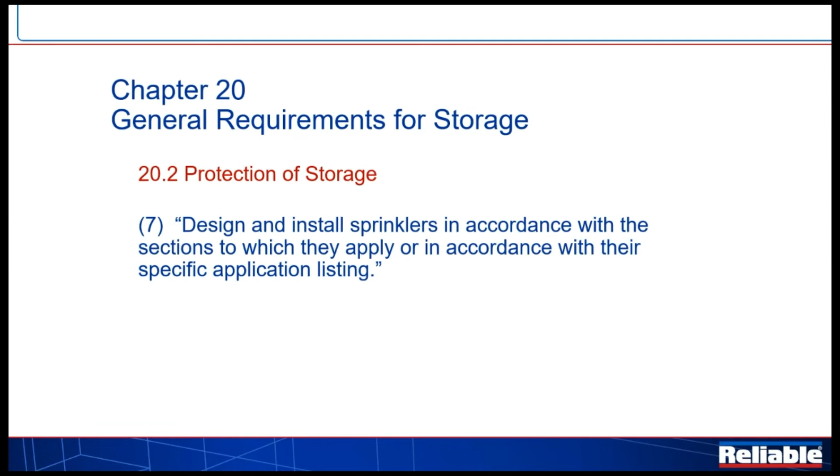Again, general requirements for storage. The commodities are now clearly listed, class 1, 2, 3, 4, and work your way through the 4 plastics categories. Very clearly now presented from lowest hazard to highest hazard, right? Class 1 all the way out to exposed expanded plastics. No longer can someone debate that. Well, they may be able to debate it, but the standard will tell them which is which, because there has been some debate about particularly the last 2 exposed plastics, which one is actually the worst.

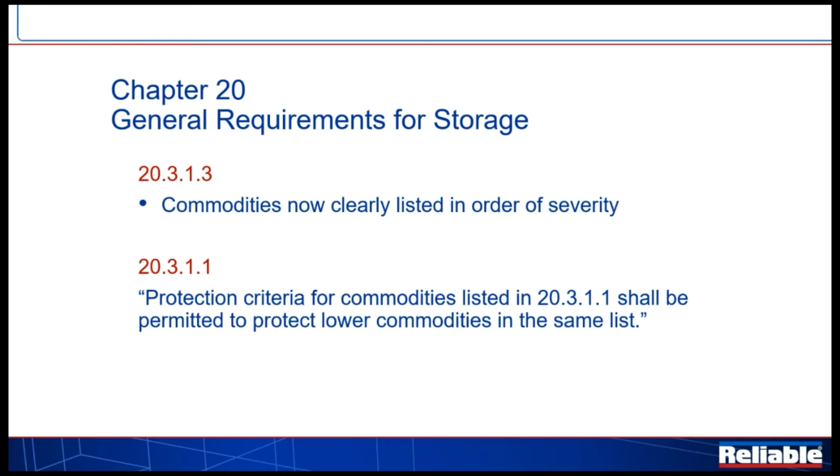And then again, just a statement that we all know NFPA 13 is a minimum requirement standard, and if I want to put ESFR in light hazard, I should be able to do that. If I want to protect class 1 with ESFR or whatever, or a class 4 design, I should be able to do that. So again, very clear that that's the case.

Plastic pallets, right? We've had rules for plastic pallets for a number of years. When you have this plastic pallet, you go up 1 class, 2 class, whatever it is. Now you're going to not only need to find out if they're plastic pallets, you need to find out what specific type of plastic it is. If they are other than those 2 listed, the polypropylene or high density polyethylene, you may be having to do something more than what was already there. So just be aware that you now have to start asking a few more questions if you're in this storage world.

Again, interesting - words mean things. There was a statement or a section earlier that talked about movable racks. Well, every rack is movable. It's just you'd have to unbolt it from the floor and essentially move it, right? That's the difference between movable and portable - that's all they're trying to address here. So if they are portable, they're being rolled around. You need to look at them because they can be butted together. You need to protect them as though they are multiple row racks, which is the same rule essentially for movable.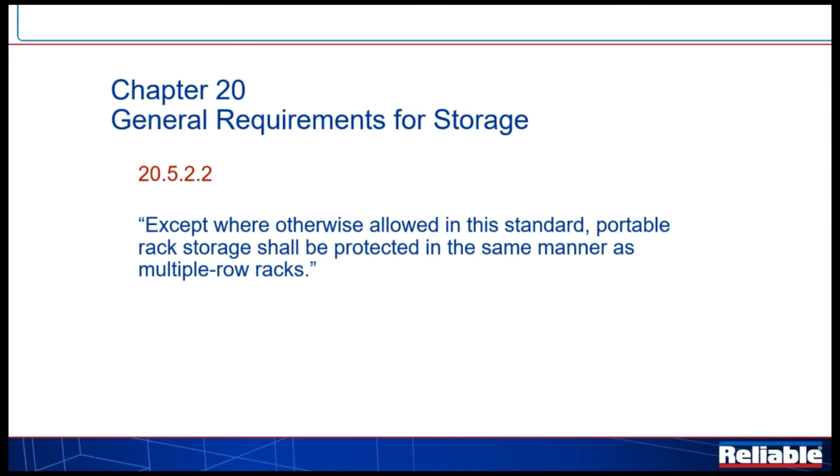Multiple row racks, again, default position shall be considered racks with solid shelves. In this case, with the multiple row, transverse flue spaces and longitudinal flue spaces at 5-foot increments, 5-foot cubes - maintain those, you're good. You have to have the transverse flue spaces in any regard. You're allowed to leave out the longitudinal and still treat them as open row racks as long as you don't exceed 20 feet deep and you provide a 3.5-foot aisle. And that rule for FM would be an 8-foot aisle, by the way.

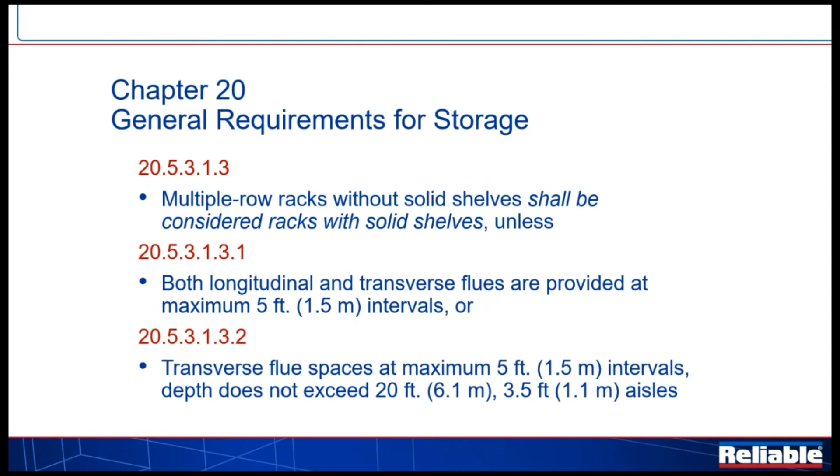So as long as you've met that, you can treat them as open. But this is something you don't want to miss when you're talking to the building owner. You've got to ask them about these flue spaces. What does this storage look like when it's loaded in there? Because you just can't look at it and go, it's rack storage anymore. Because if you miss these rules and you have to move from a design that didn't have solid shelf racking to a design that does, your boss is not going to be very happy. So just be aware of those.

Slopes over 2 and 12, can we protect them in a storage occupancy? Generally, the answer is no, but you actually can, right? If there's a specific section in the standard that says you can do it, sure. Whether they're in there, I'm not sure, but I think it's just an acknowledgement of something maybe to come. But the second one there, when you use one of these 3 options, and we've done webinars on this very topic about these in-rack sprinkler options independent of the ceiling design, right? This is the virtual floor concept that is now allowed by the standard.

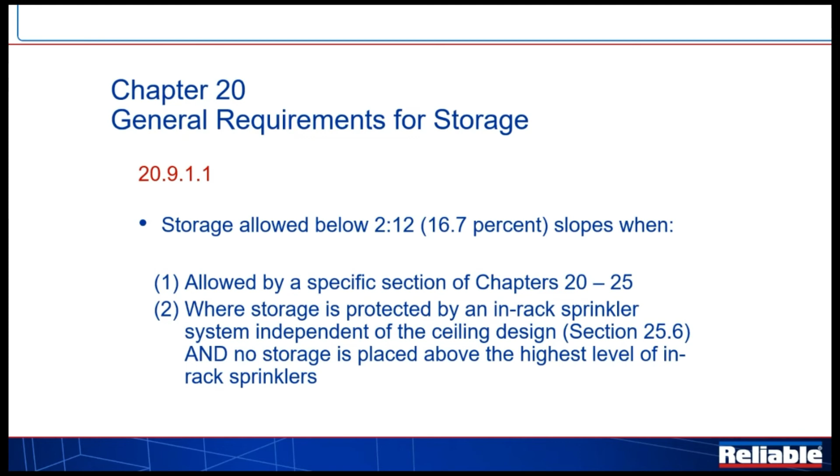And you do not store above the highest level of in-rack sprinklers, then it doesn't matter what's happening up at the roof, because that level of in-rack sprinklers is designed to protect everything below it. We're no longer relying on those sprinklers at the roof. So if we've got an old GSA sawtooth roof going up and down that they want to convert into storage, this is a perfect opportunity to be able to do some style of protection that doesn't require them to change the look of that roof.

20.19, protection of racks with solid shelves. This is where you would go if you missed the slides that we looked at a little bit earlier. I'm not going to go into all the rules, but let's just say they're not slight. It's a lot of sprinklers that have to be put in there at a lot of different levels. So again, the word of warning is do not miss this in your estimate or your design. Again, those were in Chapter 25, which we're going to talk about in just a second. Those have now been all moved up into Chapter 20.

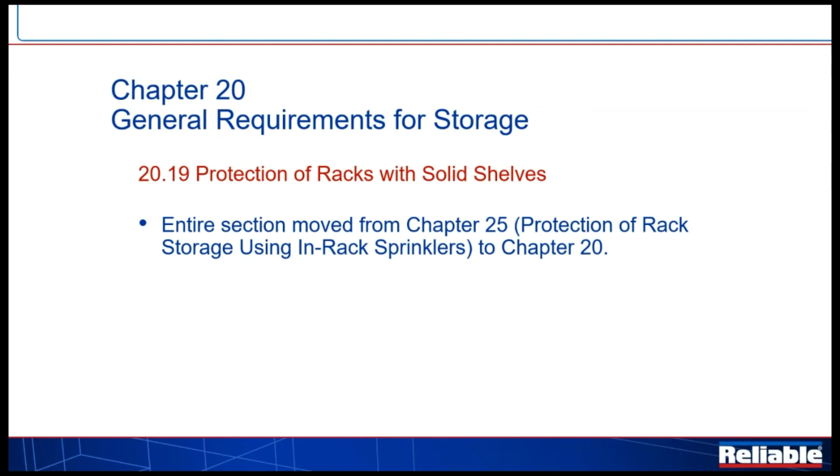CMDA sprinklers, again, we're in the single point density world that we talked about, very similar to what's happening with the light, ordinary, and extra. If you're looking at existing systems, you're going to use the old tried and true rules, and those single point densities do not apply to plastics at the current point in time. All of those in that area, and particularly for the palletized, is all built around a 2,000 square foot remote area.

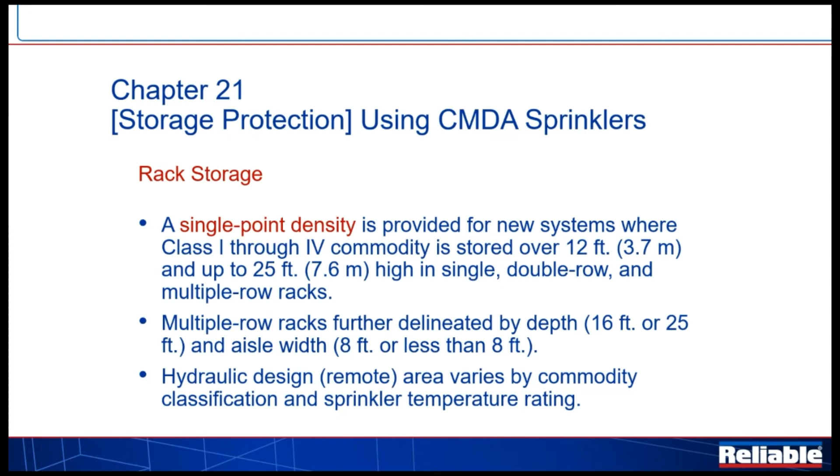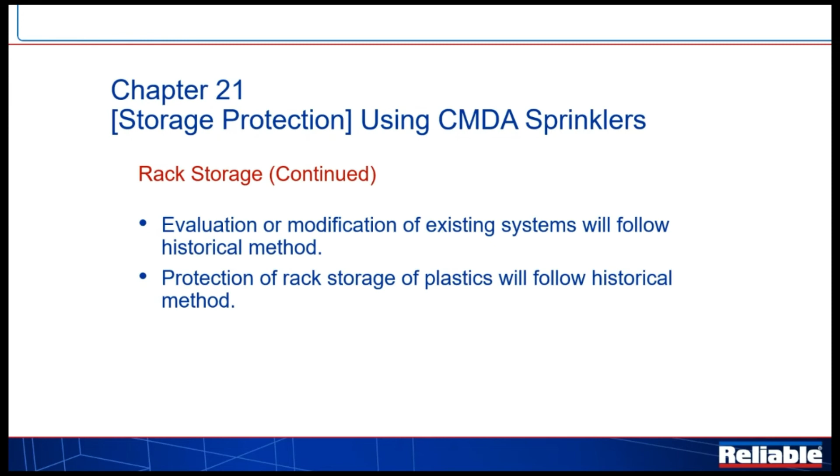When we move into rack storage, also single point density, where you're over 12 feet and up to 25 in single, double, and multiple. Multiple is further broken down by the depth, right? Whether they're 16 feet or up to a maximum of 25 feet, whether the aisles are 8 foot or less than 8 foot. There's a lot more selections that are happening in there. And it's not a set remote area. So it's not 2,000 all the time or 3,000 all the time. It jumps around depending on what you're protecting and what sprinkler temperature rating you select. And just like the other ones, if you're doing evaluations or modifications, you'll follow the old rules, which will remain in the document for a period of time.

Rich Gallagher, a gentleman of Zurich Services Corporation, recognized that we had about 6 pages of ESFR sprinkler requirements that essentially were all the same. And so what he did, and this was great work, boiled those down into one table. I mean, when you look at this Chapter 23 using ESFR sprinklers, it's about 4 pages long now. It was just a great move to get all of this built onto one table. It's going to make things much simpler from a design standpoint. Chapter 25.

So the way NFPA 13 does this now is they put a little N in front of everything that's new in a chapter. Well, if you look at chapter 25, every item in there has an N in front of it because that entire chapter was rewritten. It's not necessarily new information, it's new formatting. So I'm not going to go into all the details because it's pretty much the same as it was in 2019. And again, a shout out to Wes Baker and the folks at FM who essentially took this on.

There are 167 figures and tables in that chapter, and the intent was to relate as much of the text to a figure as possible so that you could look at the figure and understand what the text meant. It was very difficult the way it was done in 2019 to pull all of that together, but that's now what's happened. So again, not necessarily new information, rewritten information.

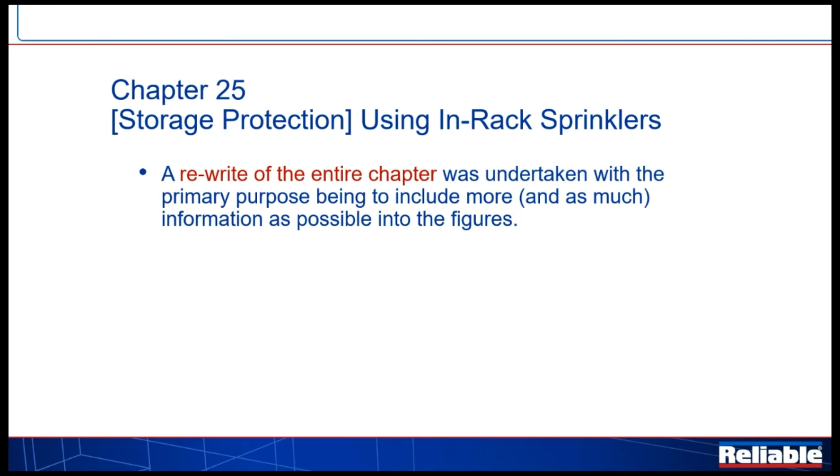We're getting close to the end, folks, trust me.

Special designs of storage protection. So chapter 26 in 2019 was called Special Occupancy Requirements, and what was in there was 34 occupancies that had another NFPA standard. These range from dry cleaning facilities to nuclear power plants. And what the committee did in 2019 is they went to those standards. Let's say you went out to NFPA 909 for cultural resource properties. There may have been 8 statements in there about fire protection. They yanked all of those into NFPA 13, and they did that for all 34 occupancies.

They've now retracted from that position and they do it by reference. They've moved it all into chapter 27. And all it says is when you have one of these occupancies, go to this standard. So again, it's a little bit of a cleanup, a little reversal of what was done in the past.

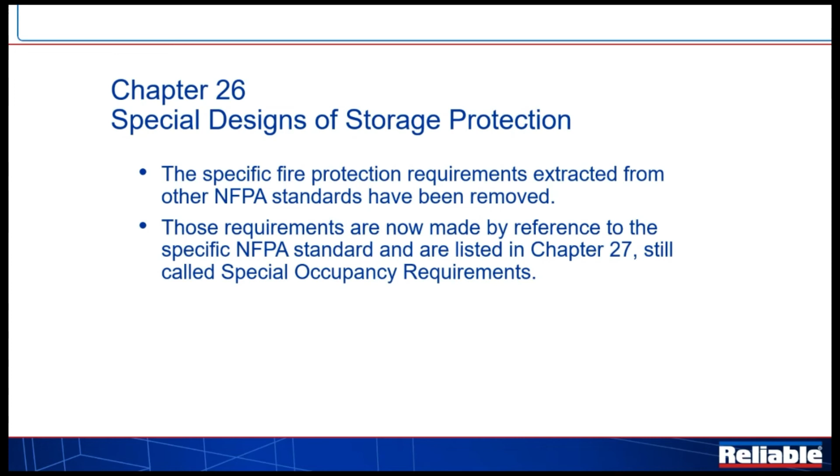Thank you. Pardon that. Now, again, those have been moved into 27. So there are some things that were moved in these special designs of storage protection. Look for these. When you hear these, think about where they fall. Do a quick search. If you have the PDF documents, it's a brilliant way to get in there and just search for automotive components and look for all those requirements because they can be substantial. That's one of them that's in there: ESFR protection of specific automotive components.

Phantom flow, you guys have dealt with this before, but this phantom flow, what was the idea here? Not real sure. The only thing I could come up with is if you had a small office on the exterior wall of your warehouse and you had to take a main over to it to drop down and feed it, the intent seemed to be that they wanted a minimum of 150 gallons going down that main. Let's say you had 3 sprinklers out there. The intent seems to be that they wanted 150 going out there. Why we're in the business of providing pipe sizing for future stuff, I don't know, but the reality is it's in there.

The problem was they said that you had to add the additional gallonage at the very furthest branch line from the source. If you've ever done hand calculations, and shame on you if you haven't, by the way, you would realize that if you added the gallonage at the last branch line from the source and worked your way back through your calculations, you would end up with more than that 150 gallons. You'd have to K up those branch lines all the way back.

So a lot of discussion went on about this, and now we've changed it to say it's the connection closest to the source. So all we're trying to do again is you're going to calculate, let's say you come up with 96 gallons, you know you need 150, you're going to add 54 gallons as a hose stream allowance, or however you want to put it into your calcs.

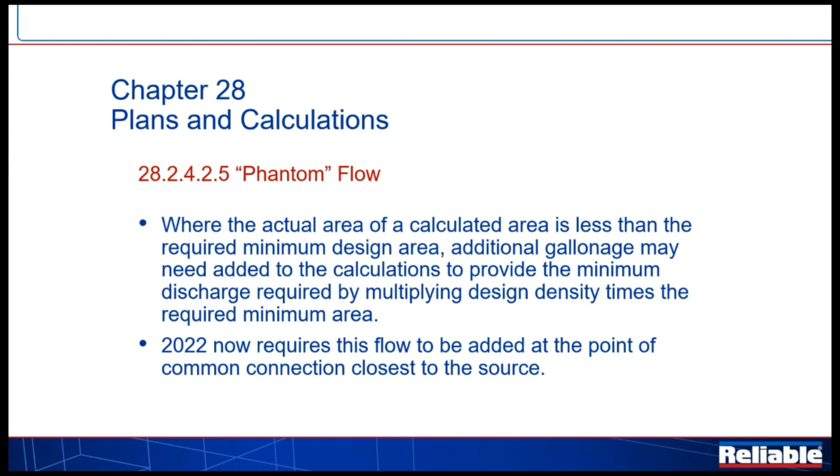You're going to roll that through that main just to make sure it's sized properly, maybe for some future use.

This again, another interesting one, calculation of design area. I couldn't believe what I was hearing, but people had this perception, and I can't say they were wrong. If you have a sprinkler that's near a wall that's protecting 15 by 15, but you're 3 feet off the wall, people were taking the design area beyond the wall by 12 feet and including it in their 1,500 square foot office remote area if it was an office environment. They were going beyond the wall with the dotted line of their hydraulic calculation remote area.

And this is now very clear that if you are up against a wall, it's the wall area. Regardless of how much water may or may not be wasted out of that sprinkler, you do not get to go over the wall where water can't spray. Seems, again, I guess it wasn't clear.

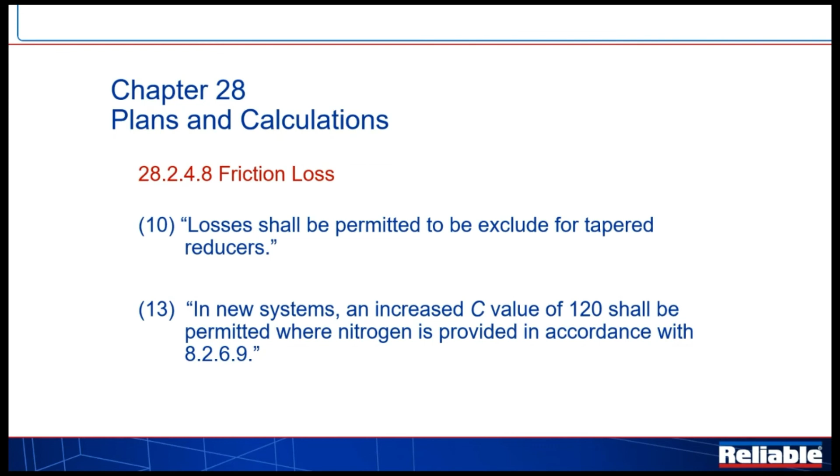Some interesting information, again, a couple additional locations when we talk about friction loss. Item number 10, tapered reducers, concentric reducers, I guess eccentric reducers. I never thought about it, but now it's clear that we don't need to include those. An allowance to use that C factor of 120 when we refer back to the stuff we've covered.

And then here's our last slide right here, just a reminder, not necessarily new information. A lot of debate whether or not you actually have to perform a trip test on your dry system at the end of the project, particularly when you use the hydraulic calculation or the water delivery calculation program. Well, people were saying, well, I don't have to prove that, the calculations prove it. You may not have to prove it, but you still have to do the test. And the test is done to establish a baseline for the future.

Right. And the follow-up to this says, okay, if you did calculate it, you're exempt from the specific water delivery time, but you still have to trip test it and you still have to time it out and prove that. And one thing to bear in mind here is that those calculation programs are designed and required to be accurate within 10%. So if you calculated at 60, theoretically, the maximum you should be able to go to would be 66 seconds. This exempts you from that.

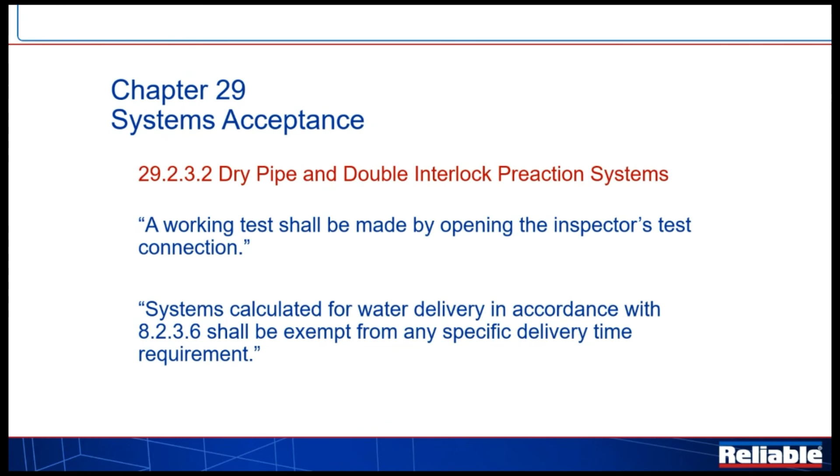But just remember that if you're out there 70, 80 seconds, let's realize that you've got a problem on your hands. Let's do good fire protection and make sure that we address what may or may not be causing that situation.